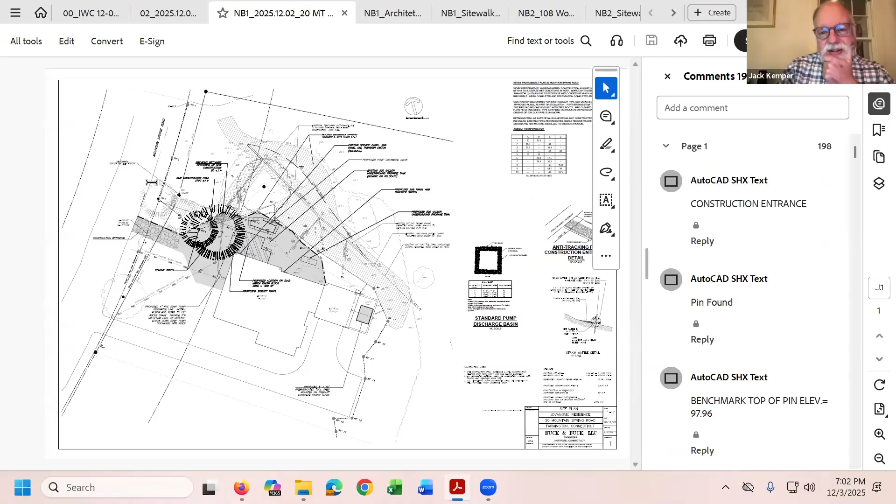First item on the agenda is Jack Kemper, 20 Mountain Spring Road. The applicant here? Yes, Jack. Good evening. I wanted to thank the commission for coming out a couple Saturdays ago to the site. Anna is here, the owner, and Bill Aston is here, the engineer. So for any questions, we can answer them.

I think we got some guidance from the commission on that walk, and I'll probably have Bill talk about that. I think a stockpile area was moved, and a couple things. I'll let Bill speak to that, and then we're available for any questions.

I don't want you to reintroduce the whole project again, but could you speak to the details that the town staff raised and how you addressed them. Yeah, I think I'll let Bill talk to them because I think they were mostly engineering things. Bill Aston from Buck and Buck Engineers.

The changes that we made to the plans based on staff comments are we took away the stockpile and replaced it with a pump discharge basin. And we added some notes that all the excavated material will be directly placed into a truck and hauled off of site rather than stockpiling it.

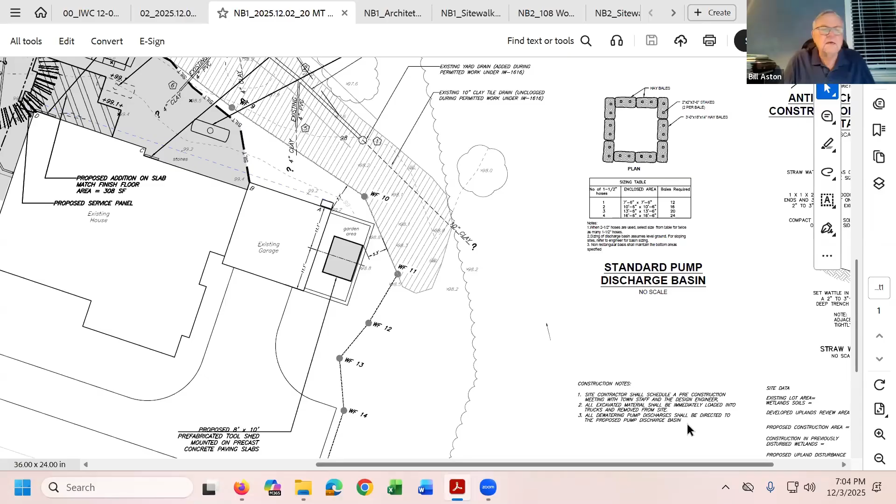I just saw Bruce's new comments, and he'd like the hay bales not only staked but sort of dug down into the ground a little bit to prevent the water from just flowing under them. It will flow through them anyway, and then along the grass surface between the pump discharge and the swale that's to the north across wetland soil, but it's all grass, so that will be a good media to take out any silt that gets through the hay bales.

There'll probably be a little discoloration during the process, but those fines are so fine that even a hay bale won't take them out. But we've got about 30 feet of grass for it to flow through. So that should do a pretty good job of cleaning up the pump discharges.

I think the only other thing is that the pump chamber will be able to be used not only for the foundation excavation, but also the excavation for the proposed propane tank. And I'll just add that we talked about having a pre-construction meeting with town staff that we've agreed to before the foundation goes in. Right, and that's noted on the plans too, as part of the construction notes that we added.

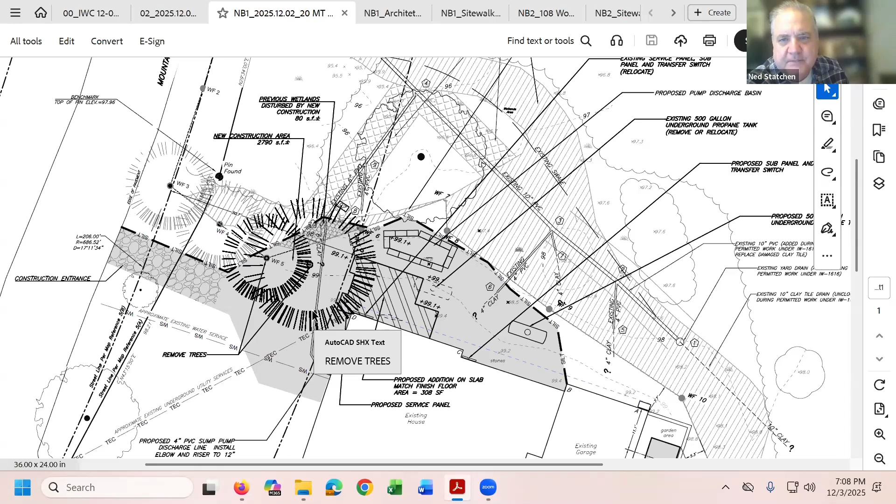Do you have a method to remove the water from the hole as it comes in? It's going to be very muddy water. Is there an operation you've determined to help dewater that hole before the tank can get put in? And would it include some sort of filter for the water before it goes back into the wetlands? We'll use a sump pump, a dewatering pump, out of that excavation and pump it into the pump discharge pit.

So we'll use it for both the propane tank and for the foundation. They'll over-excavate it, put stone in, and then continue with the excavation. It will probably require some kind of hold-down pad too, and we'll be working with the propane supplier to come up with all of those details.

I don't know what the schedule is like, but by the looks of it, the tank will have to be done first. So you're going to have a pre-construction meeting for the tank and the addition. If they're done concurrently, it could be one meeting. If they're not done concurrently, based on weather or whatever, then I'd just like to see them both done.

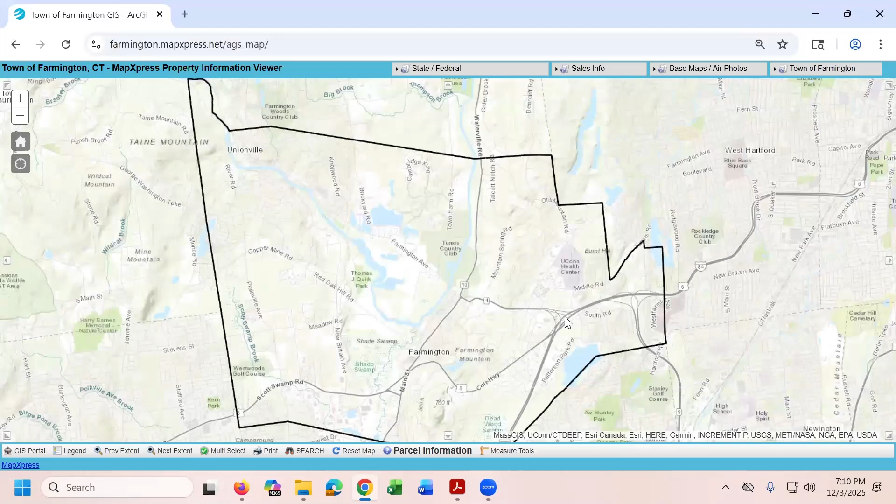Yeah, I just had one. I was looking at the town GIS and it shows that the site is within probably two natural diversity database sites on the DEEP website. So I was just wondering if anybody had contacted DEEP regarding that situation. I have not. We have not.

The database contains areas where there are locations of endangered, threatened species, or species of special concern, and you should be contacting them. They would identify what those species are and provide recommendations for mitigation measures or best management practices while you're constructing the project. I think since I've worked there, they now have a portal where you could apply online, provide your project information, and they'll get back to you with the identification of the species and those best management practices. So I recommend that you do that.

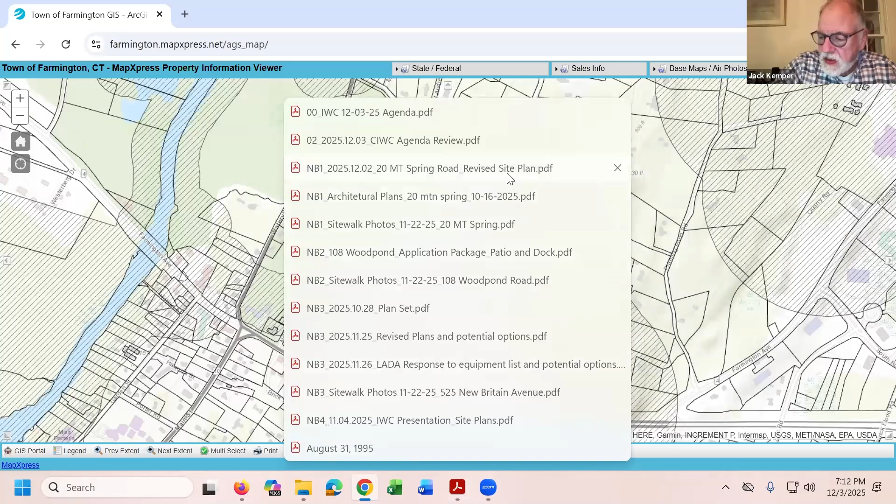So that's the NDDB website, right? Right, Natural Diversity Database. Is that part of DEEP, Dave? Yeah, it's in the Wildlife Division. All right, writing it down. I'll help you with that, guys. Thank you. That's all I have.

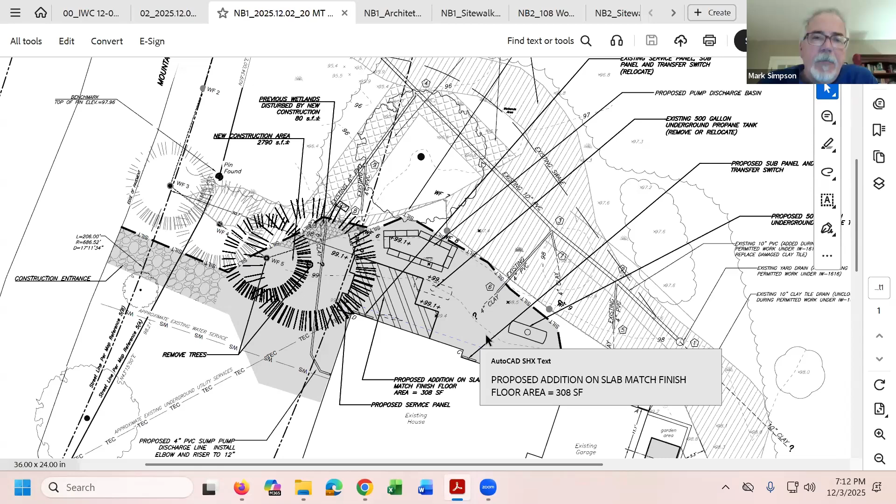Dan Popovic, am I saying your name right? Popovic? You are. Okay, thank you. Do you have any questions? I do not at this time. Okay, Mark Simpson? No questions. Alana Carveth? No questions.

Okay, I have a question for you, Bruce. What's your comfort level on this, only getting the plans yesterday? Do you think that if we were to pass this, we could put the stipulation that they need to continue to work with town staff? Oh yeah, I'm fine with that. I'm fine if we just, what I would suggest is that the order would be to determine the significance and then vote on the matter.

I have a note here to possibly include the conditions of approval that I have in the agenda review, and that would be items B through G. And I would include the two that came up today regarding the installation of one tree in replace of the two trees being cut, and also just contacting NDDB. So I'm fine if we put this all into one.

Well, let's go through. I'll poll the committee. We discussed it a little bit at the site walk, but we didn't come to a complete decision. So let's see if people think that this is a significant activity, in which case we would need a public hearing. I don't think it is, but let's see what the rest of the commission feels. Rich? I do not think this is significant. Okay, Dave Fox? I agree.

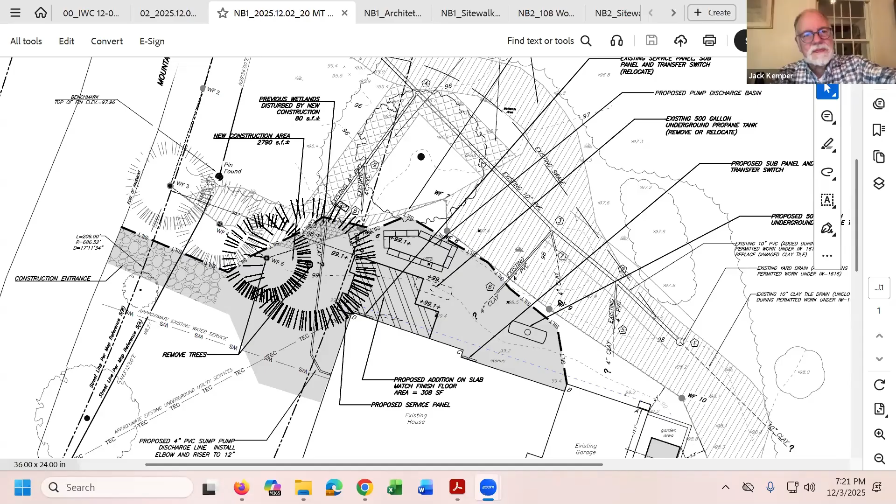Good luck with the addition. Thank you. Thank you all very much. Good night. Good night. Night.

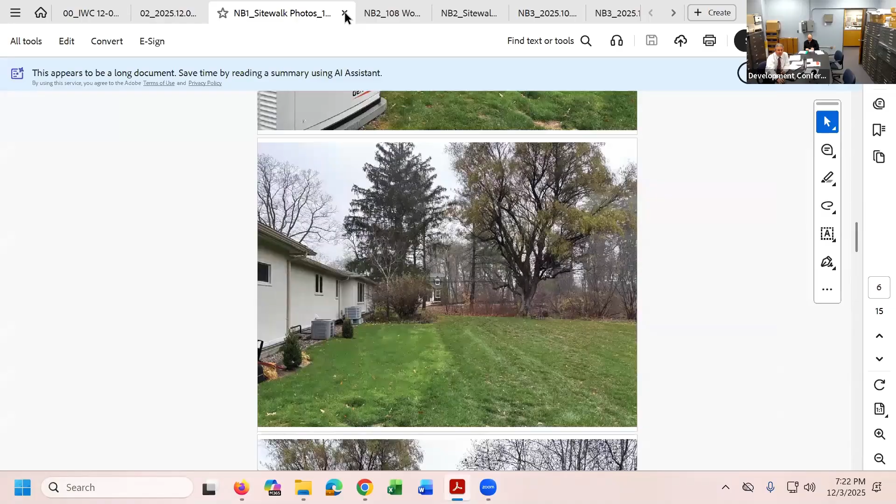Application's up on the screen. You can, well, if you want to give a brief overview, I'm not sure who was here last week or at the last meeting. Okay, yeah, so I'm Kevin Stavely O'Carroll.

I'm here with my wife Julie. You can see in this drawing we have a shed that is 8 by 10, and we've proposed putting an addition onto it. If you look at the entire footprint, you see the addition. We started it before we figured we had to ask for approval. So you can see it there in the pictures, and the footprint of the addition is less than 200.

It's 18 by 8. But when we were talking about it last time, we were taking into consideration the size of the roof, because that would displace more water. So that's what some of the confusion was.

We'd like to get approval for this and then a dock to come out from it. If you go back to the initial drawing, it'll show you where the proposed dock is. That was approved by our group here, the lake community, and it was agreed that it would be 20 feet away from the hedge line, so it didn't interfere with our neighbor's privacy.

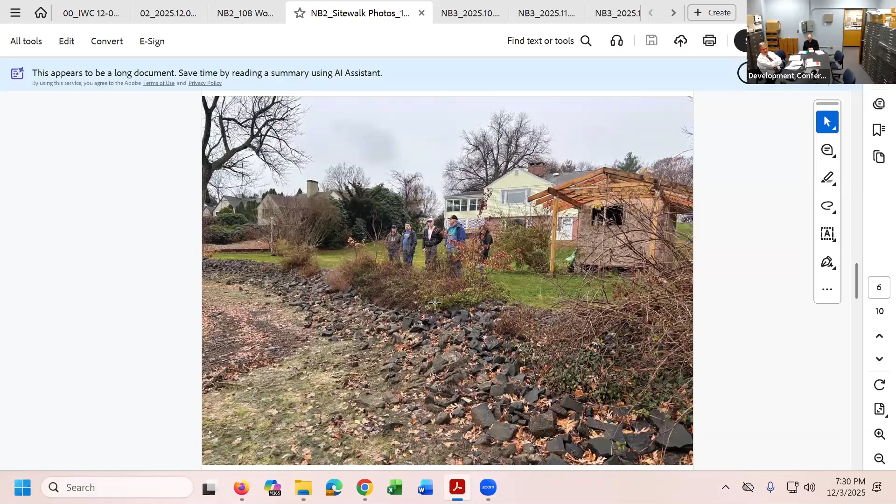Thank you. Just so I understand, what does the B and C portion mean? Do we have to do additional things? These are the comments from Bruce and the town staff. Erosion control shall consist of straw wattles - that's a tube made of hay around the construction area. And notify the planning department once all control measures are in place prior to any start of construction. Bruce can go over this with you before you get started. The main thing is the patio and the dock getting started - those are the areas that are going to need it.

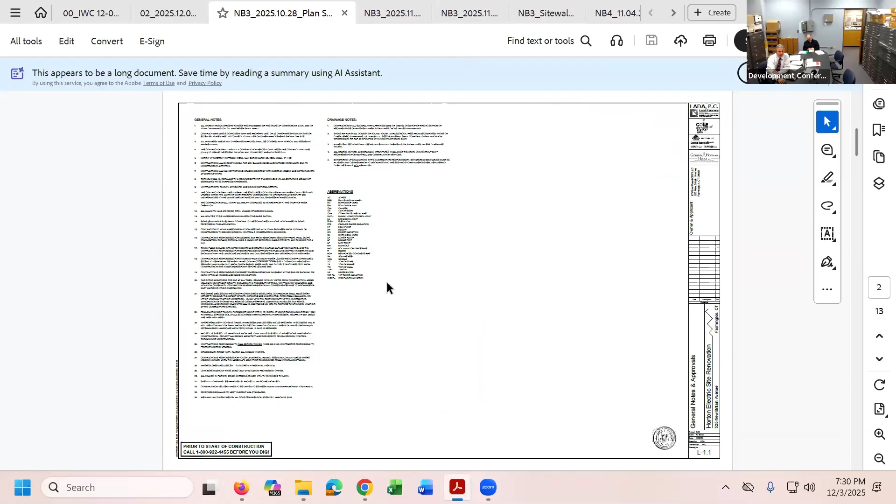All right, Bill, are you there? Yes, I'm here. All right, I've got two sets of plans - I got the original set here, and then I have that revised set you sent with all the options. Let me know which one you want me to use. Let's use the revised ones right now. All right, let me go quickly - is there a certain page you want to be on?

Yeah, let's just use those, because that's part of what we discussed in the field, and it also reflects some of the comments that Bruce, you have made over informally to us. I met the various members of the commission on the site along with other members of the team, Brian Panico from Cole Engineering, Ian Cole, our soil scientist, and Warren Horton, who owns the property now. You'll recall this is a 2-acre site. It's in an industrial area. Buildings existed since the early to mid 1970s.

We are proposing to construct an outside storage area, about 14,000 square feet to the north, immediately adjacent to the building. We walked around that area - it's a space that was once approved for a building addition. It's been used for other things informally since then, and our proposal is to pave that and put in a stormwater system that addresses the entire site.

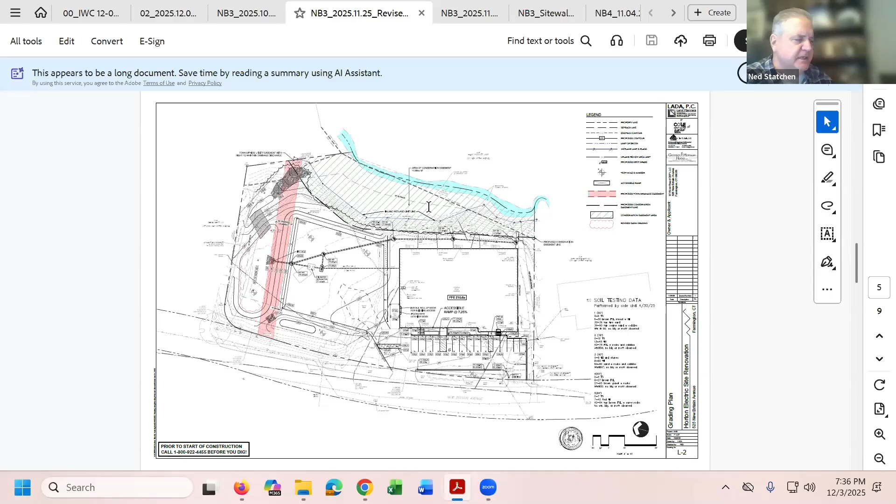I had a question that during the site walk, there was an area with an erosion gully that had crept into the overall backyard of the property. Did that get into the town's statements or your staff comments? No, unfortunately, I don't think it addressed that. I know they were saying that embankment was very soft.

I think we thought the main reason was the gutters probably weren't cleaned. Now with all the gutters being cleaned and tied into a formal drainage system, that should stop that. Yeah, but we had discussed at the site meeting that they should repair the gully area, the erosion gully area, right? All right, I'll add that to it.

On the plan, Mr. Chair, I had not proposed that because I am concerned about placing fill on that hillside in an isolated area immediately above the wetlands. That gully in this picture is just in front of where the Japanese knotweed starts. If the commission would like us to fill that, we certainly will, but it makes me a little nervous to be adding fill in that area.

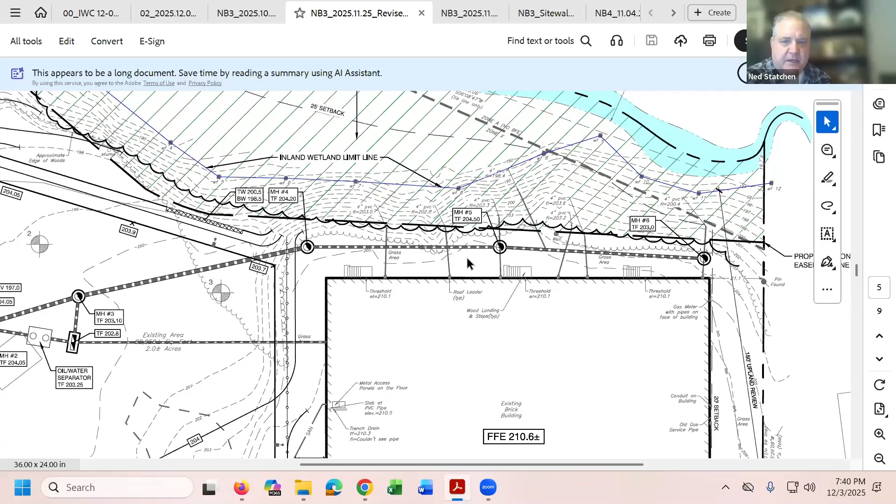I think we talked about how the ponding that happens in front now is going to be avoided because you're going to totally regrade that front parking area away from the building and carry it over to the secondary sedimentation, correct. Bruce is showing the direction of the flow. We'll be directing it into a water quality basin, and following treatment, that water would flow into the stormwater basin.

All right, that's the only question I had now. We'll poll the commission - ask your questions and let me know if you think this is a significant or non-significant activity. I do not think it is significant after our site walk visit, mostly because the area being paved has been excavated and re-excavated and pushed around many times. So I don't think we're disturbing anything that hasn't been disturbed several times. But that's all I had for that.

So we'll start with Andre - questions and significance, please. I do not have any questions. The riprap, honestly, and filling that gulch area were my two questions, and they were answered, and I don't think it's significant. Okay, Rich? Don't have any questions, and non-significant.

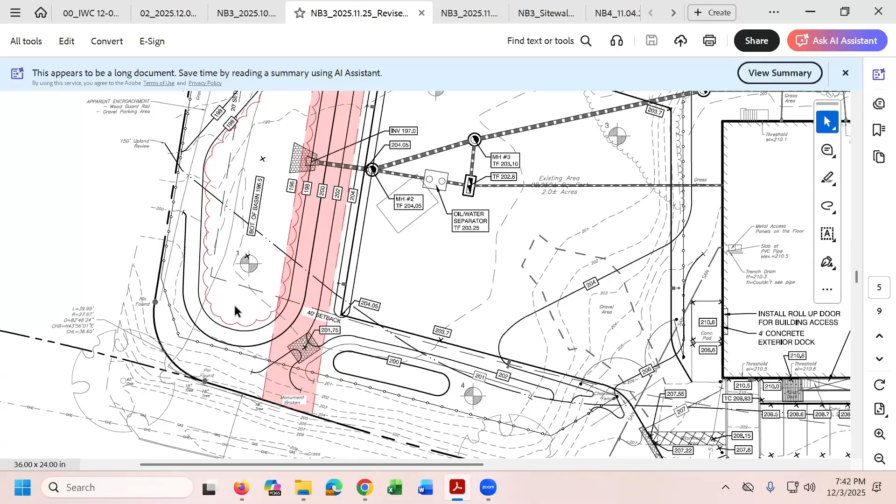Thank you, Dave Fox. Yeah, I have a couple of things. I was looking at the plans and it looked like the temporary sediment traps, I guess for during construction, are the same place as the infiltration basin. I thought that was not a recommended activity.

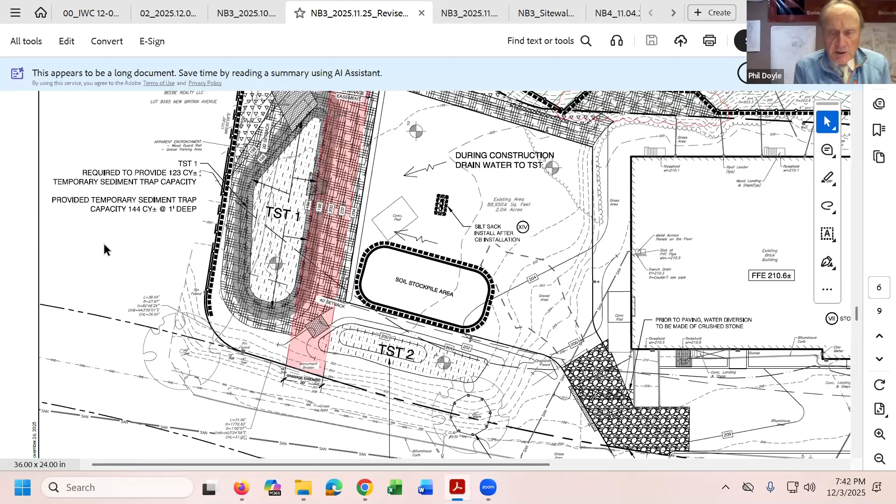We have a relatively limited area for that type of temporary sediment trap. We would have to be cleaning those out as part of the program before we would turn that into a stormwater basin. We have to remove any material that was in there and reestablish that existing subsurface soil layer.

Commissioner Fox, yes, that is one of our big concerns that we always have. As part of this one, we said the same thing - there's really no room to put a temporary sedimentation basin. So they would keep it about a foot or two above the bottom and then come back and excavate it down to final grade prior to any kind of paving. If you're okay with it, I'm certainly okay as well. It was one of the ones we were trying to figure out the best way to do this, and I think that is the only way, unfortunately.

My other question was on the conservation easement. Part of the conservation easement is where one of these stone riprap areas are going to be. Is that going to be a problem, Bruce? Having activities within the conservation area - yes, our comments do reflect to either move that easement line or pull that back, so all this work is out of that easement. As long as that's worked out, that's all I have, and I don't think it's a significant activity, particularly with the conservation easement. All of the work is being done in previously disturbed areas.

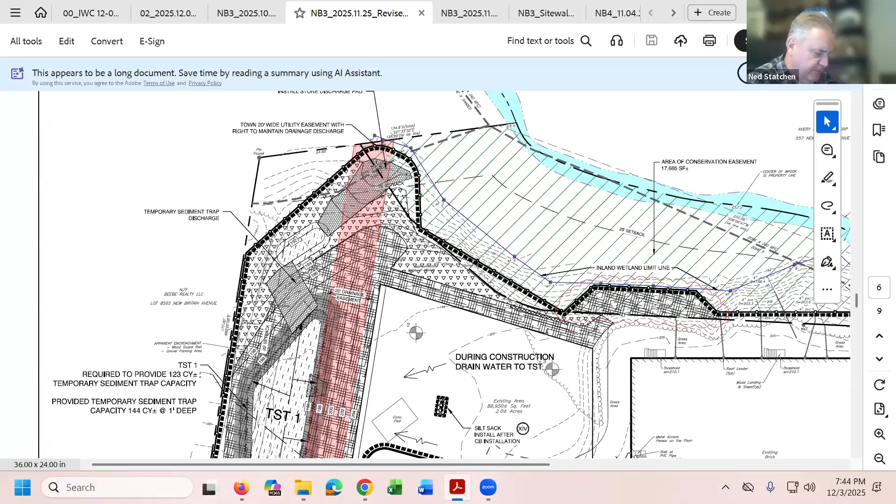Dan Popovic: I was not at the walk, but after looking at the information and listening to Mr. Doyle, I have no questions, and I do not think it's significant. Mark Simpson: No questions and non-significant. Alana Carveth: I have no questions and I don't think it's significant.

So we'll deal with significance and then we'll vote on approval with the stipulations that the staff and the commission have brought up.

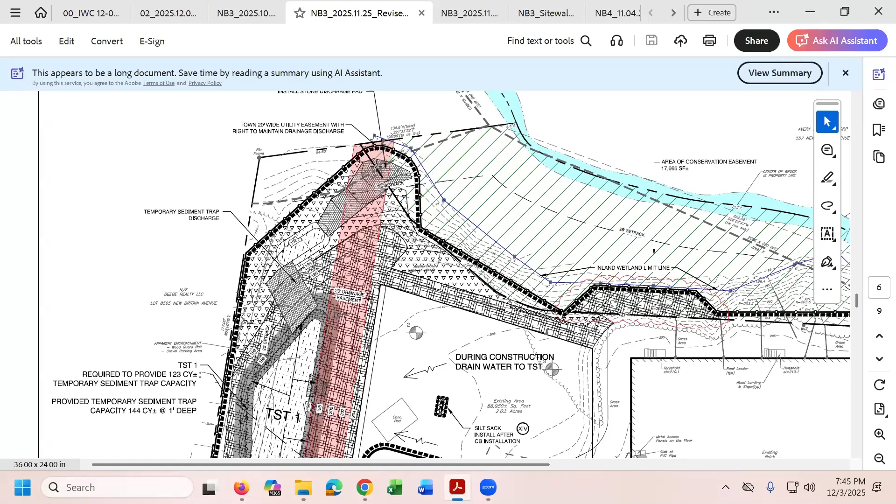Chair will entertain a motion that this is not a significant activity. So moved by Dave. Second. Motion has been made and seconded that this is not a significant activity. All those in favor say aye. Aye, aye, aye, aye, aye. Opposed? Abstain? Motion passes.

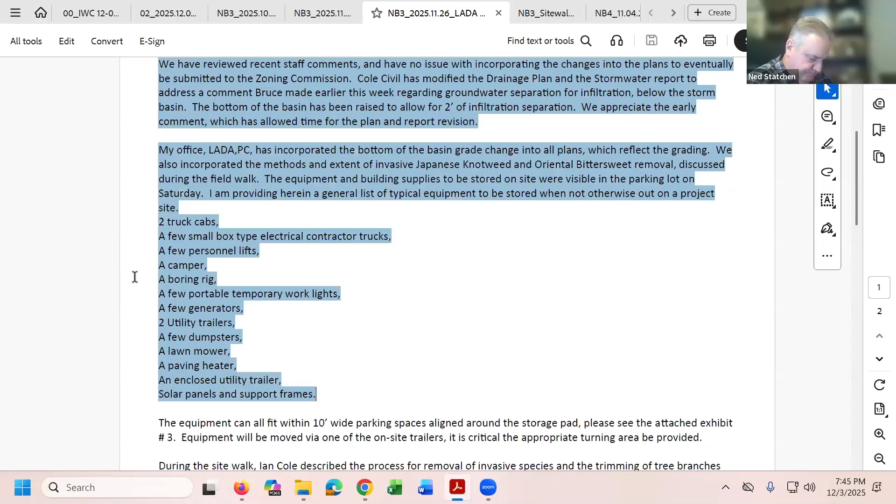In regards to the staff list of equipment and materials - Chair, there was one other item, just going through the conditions of approval, that the commission and staff did want to see a list of equipment and material to be stored. So this was a typical part of their list here I have on the screen of what they plan on parking or storing back there.

Okay, and then all right, I don't see anything there that raises my concerns. Does anybody have any considerations towards the list that Bruce is showing us?

This is Rich. I just assume the dumpsters are going to be empty. Correct, correct - the dumpsters are usually on projects, but when they're not on the project, and I think there might have been one on the property when we were there, but they're empty. Okay, that's my only question. Thank you.

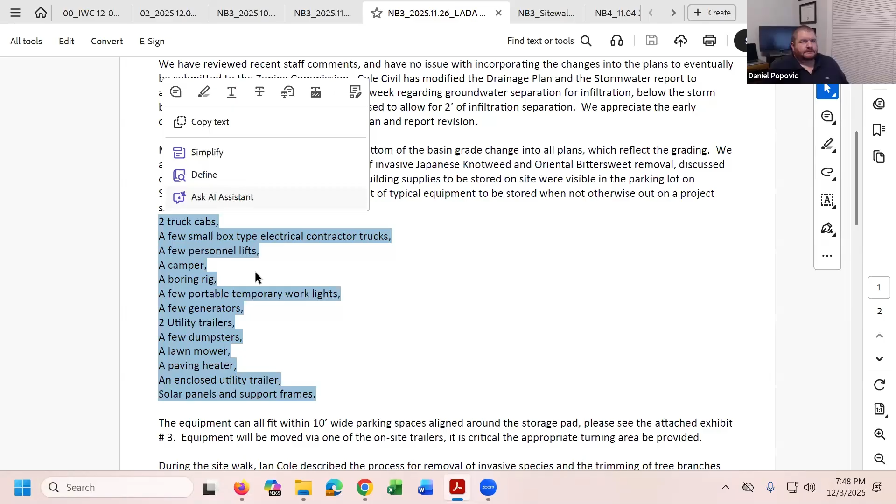Do I need any other stipulations, Bruce? No, I think you hit everything there. Okay, can I get that motion please? So moved, Mark. Second. Andre was in there, Mr. Andre - yep, second. All right, motion is made and seconded to approve the application with the said stipulations. All those in favor say aye. Aye, aye. Opposed, abstain. Application passed.

All right, good luck. Thank you for your time. Thank you.

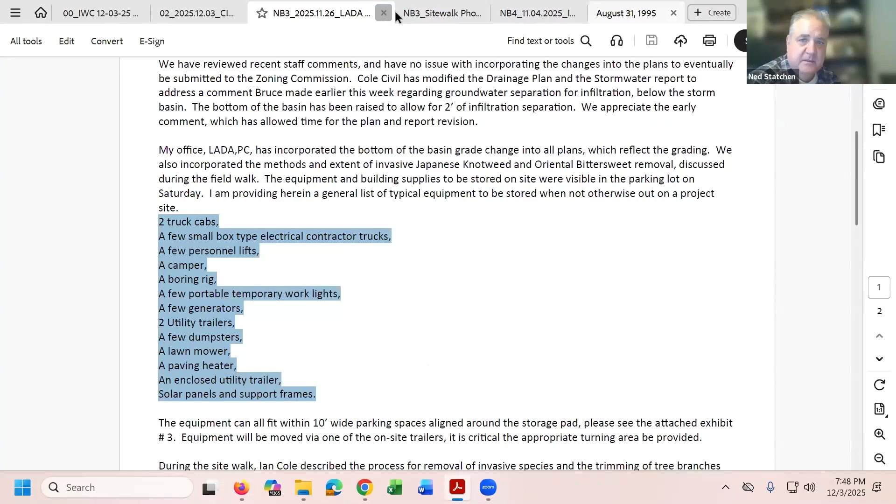Okay, next item on the agenda, Big Y Foods, 500 South Road.

You ready, Mr. Chairman? Yep, go ahead and give a little explanation of your project, mostly focusing on - I know you've already had discussion on it, but anything you've done to meet the town staff recommendations.

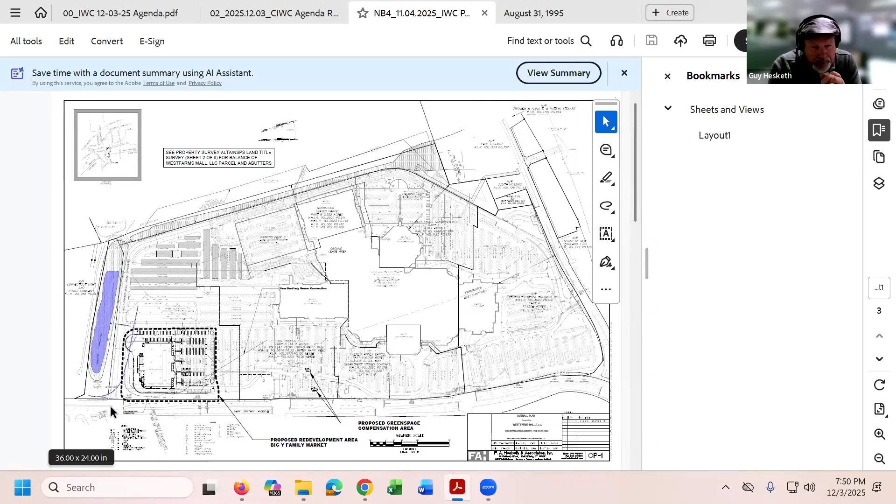I appreciate that. For the record, my name is Guy Hesketh. I'm a licensed professional engineer with F.A. Hesketh and Associates. Our corporate offices are in East Granby, Connecticut, and our firm assisted Big Y Foods Incorporated in the preparation of the applications and materials before you. Subsequent to our last meeting, I'll just review quickly: in summary, we're going to propose to build a new Big Y family market on the southwest corner of what we call the Westfarms Mall parcels, located just to the north of the South Access Drive.

To the south of that Access Drive, you can see on that plan that Bruce is highlighting, there's a stormwater detention basin there. That stormwater detention basin is a resource area. As you can see, there's a small portion of the work on the southwest portion of our redevelopment area, defined by that bold dashed line, that falls within your upland review area.

So at our last meeting, we gave you a comprehensive presentation on what the elements of that proposal were.

The ones that impact the stormwater and wetlands resources: the current stormwater collection system located on the southern portion of the mall property, which primarily drains paved parking areas, drains into that stormwater detention basin, including all of the area where our proposed redevelopment is located. Most of that area is characterized as paved parking, with the other portion being turf parking. All of that stormwater is collected and put into a storm drain system that discharges into that stormwater basin.

When we do our development, we're going to collect that stormwater and also discharge it into that stormwater basin through the same discharge pipes. Then that basin leaves, water leaves the basin, and a 72-inch pipe travels north along the western side of our project area, snakes around, and discharges across New Britain Avenue into Rockledge Brook.

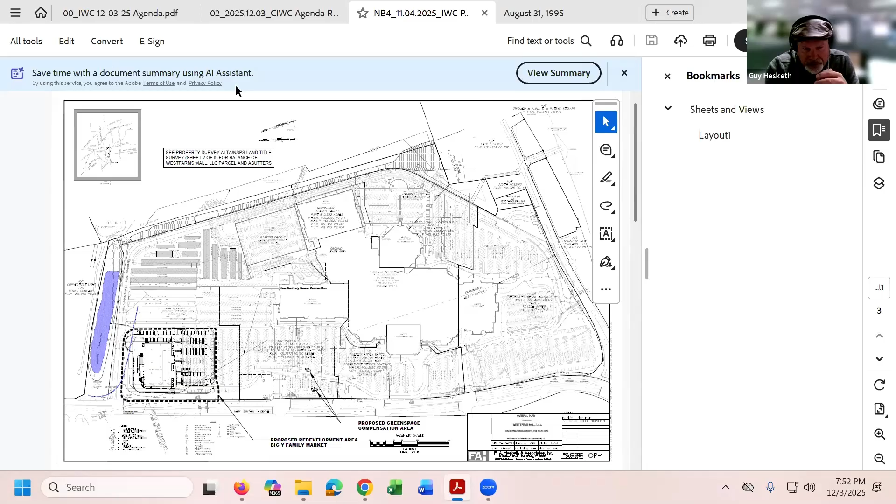So we're not changing any of the drainage patterns on the site. We are, however, going to incorporate into our stormwater management system a couple of underground stormwater infiltration and detention structures that will mitigate any peak increases of runoff from the site, ensuring the peak rate of discharge leaving our redevelopment area will be less than the existing condition peak rate of runoff.

You can see on the map that Bruce has here, there are 2 underground stormwater infiltration systems. Those systems will collect stormwater from the loading area in the rear and the east and west sides of the building area. And in the north parking lot area, the redeveloped parking lot area, that stormwater will be collected and discharged into the same storm drain pipes that travel south and discharge into that basin.

So subsequent to our previous meeting, we did meet with staff. Staff had a number of suggestions for making improvements that would increase treatment for the stormwater. That included putting trap hoods on all of our basins, integrating some hydrodynamic separators into our design, and increasing the size of at least one of the smaller underground infiltration systems — we're going to add another row, increasing the capacity by 25%.

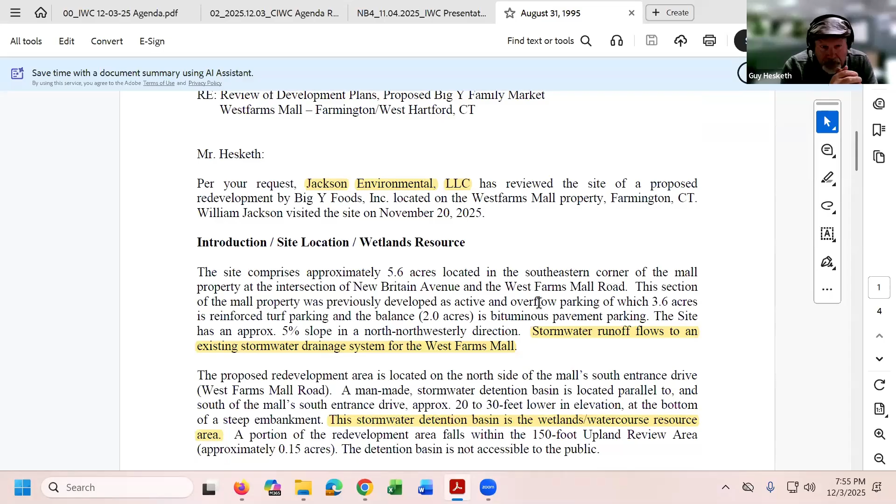That's pretty much in a nutshell. But the conclusion that Mr. Jackson has on the last page of that letter indicates that he believes the measures we're implementing for stormwater management and for soil and sedimentation erosion control are protective and will result in no adverse impacts.

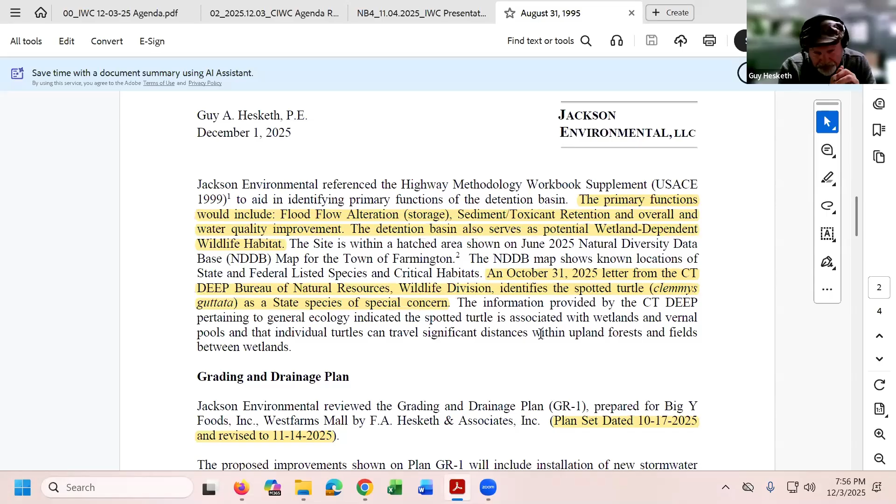He also looked at the measures we're proposing, as you recall, the NDDB bubble shows up in our area. We submitted the request online to the NDDB people at DEP, and they responded that it's potential habitat for the spotted turtle, listing a number of recommended measures, both during and prior to construction, and periodic inspections to make sure no turtles enter the project area.

Mr. Jackson looked at that and indicated that the characteristics of our redevelopment area, since it's essentially a parking lot, don't have the habitat these turtles typically frequent or an area they'd be likely to hibernate. But we're proposing a silt fence barrier along the southern side of the landscaped area on the southern access drive as a turtle barrier, and Mr. Jackson agrees that's a reasonable measure to provide extra protection.

So I think we've pretty much addressed what the commission asked for at the last meeting, and I know I gave a pretty extensive and comprehensive presentation then. So if you have any questions, I'd be glad to answer them.

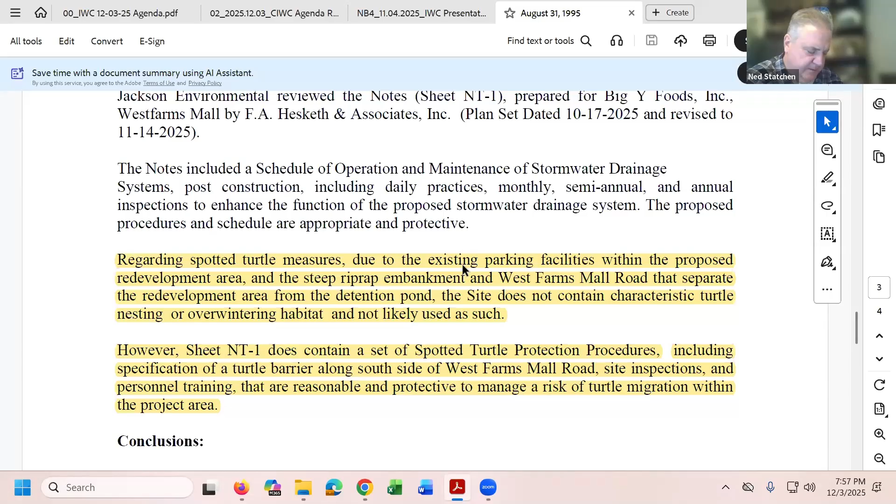Thank you. Yeah, I did take a look around that property, and it's got the flow-through pavers or whatever you want to call them, and it's still a parking lot. Then I went over to look down on the wetland, and it's a very steep grade going down to that wetland. I'd think it'd be pretty difficult for turtles to make that climb, then get across four lanes of traffic and onto your property. So I think that extra protection will work out to make sure they can't get there, by any chance, if they did.

I don't have any additional questions. I know at the previous meeting we did vote that this is a non-significant item or project.

Bruce, have they met your requirement on town staff review comments, do you think, or should we include a stipulation for that? Include that, because we had a meeting Monday afternoon and discussed our comments, and they indicated—I'll let them speak for themselves—that they had no problems addressing our conditions of approval.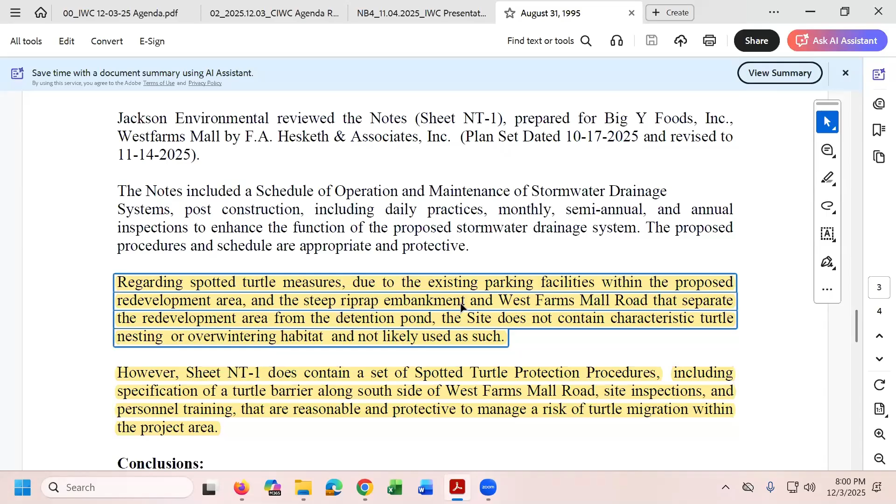Andre? I do not have any additional questions for this project. Rich? No additional questions. Dave Fox? Just a question for Bruce—the bottom of your page has conclusions, but we can't see what they are. Oh, sorry. There you go. How's that? Thank you, that's it right there. Thanks, Bruce, I have no further questions, I'll read these. Dan? No questions, thank you. Mark Simpson? No questions. Alana? No question. Okay, so everyone's had their questions answered.

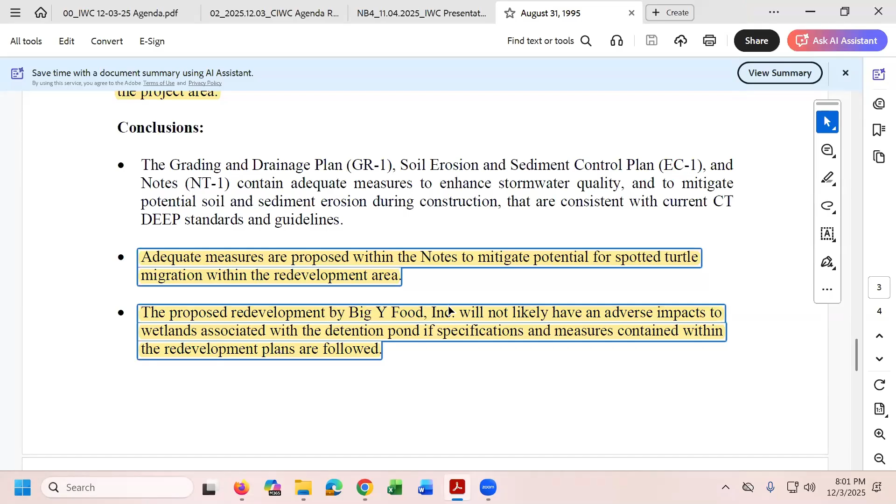So the chair will entertain a motion to approve the application with the stipulation that town staff review comments be addressed, knowing that many of them already have been, but we'll keep that in there. Can I get that motion, please? So moved. Dave will second. Motion made and seconded to approve the application. All those in favor say aye. Aye. Opposed? Abstain? Motion passes.

Good luck to Big Y. Thank you very much. Appreciate your time. All right.

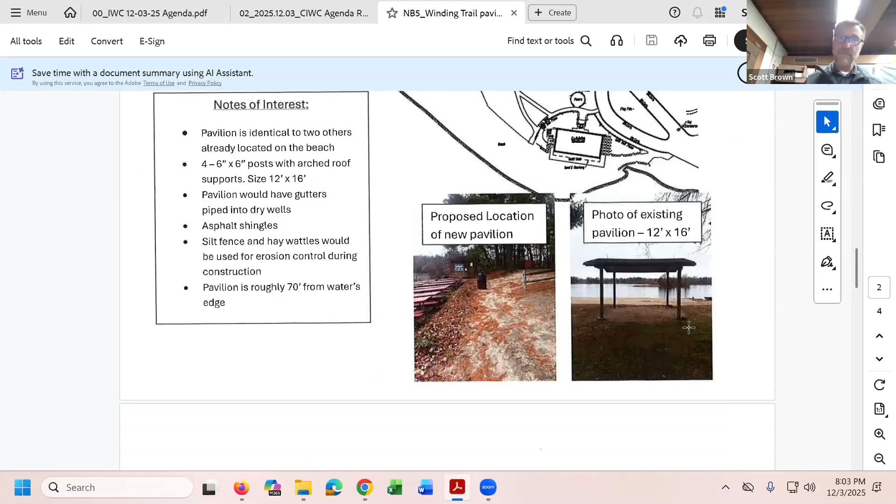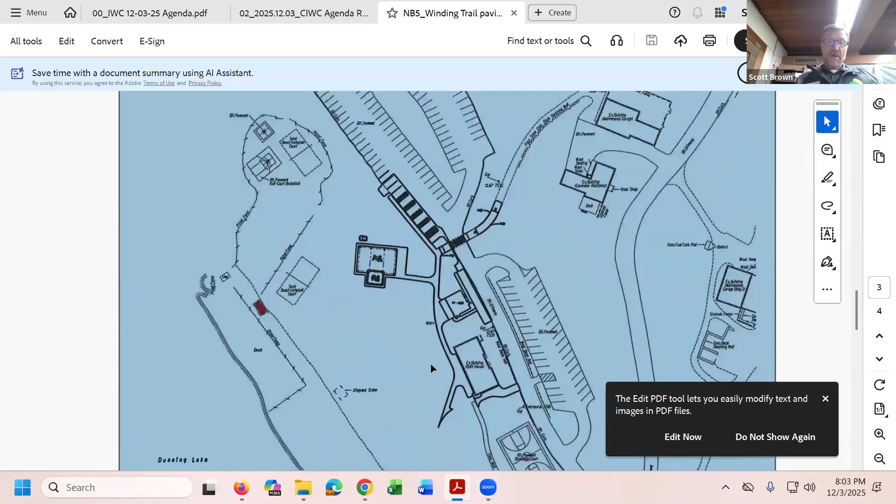Not sure what else I need to tell you. We will certainly do the silt fence and hay wattles during construction. This will just have a sand bottom, no concrete floor. It's a company we've used called Unalam out of Unadilla, New York. We've done probably 12 or 15 of these. Two years ago we did a rather large pavilion, the Lakeside Pavilion, which was 40 by 80. This is just 12 by 16, a little area to provide some shade and a space to regulate the kids coming in and out of the camp swim area.

Okay, any questions? And you said there's going to be 4 typical round concrete footings? Yeah, I also provided the town with the engineering on that. They're 24-inch pylons that would be dug. It's only 4 posts, as you can see in that photo there, and it's all designed based on wind lift and hurricane levels and all that stuff.

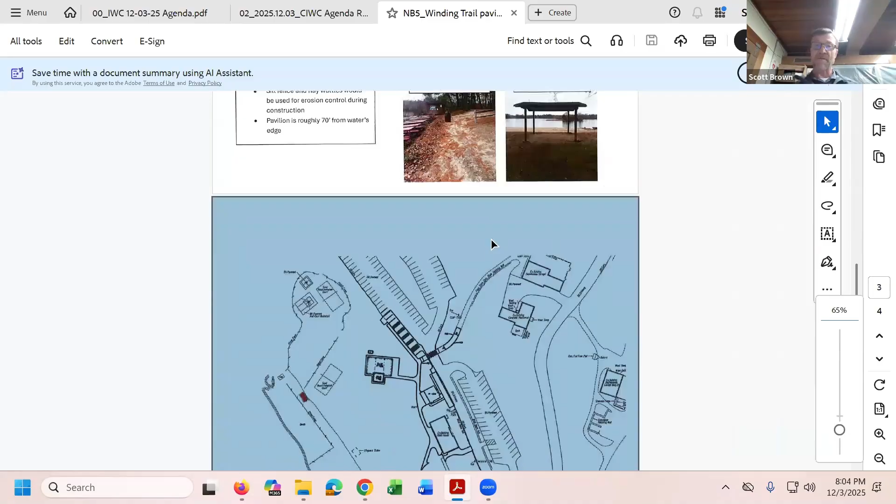Is it designed to withstand that in here? I don't see it in the submittal that you sent us. Is that somewhere in here? It was a form called RW White, unless I'm forgetting, but maybe we didn't get it. I can certainly get you that—it's the same submittal we've used on all the larger pavilions. We've used it for the last 10 years, but I can certainly get you that.

And is that comparable to the usual sonotube footing? Correct, yes. Yeah, okay.

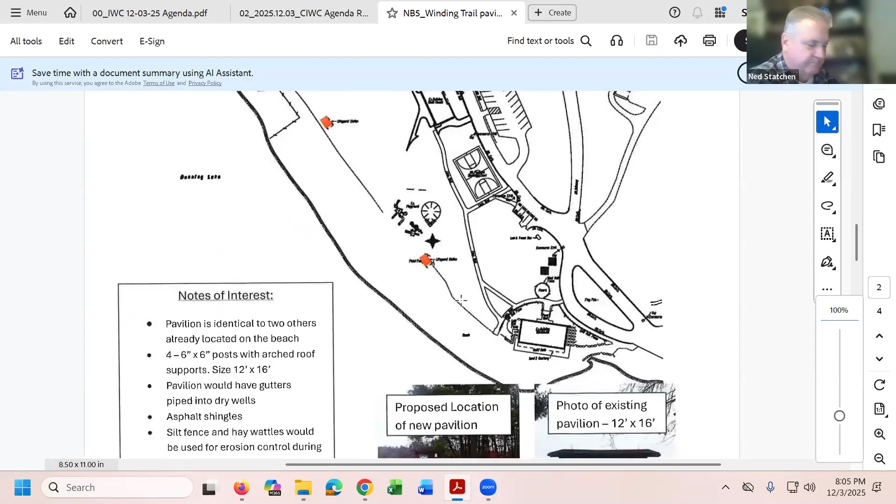Are you bringing that up, Bruce, or are we all set? Oh no, sorry, I can't get it from here. Okay, all right, no it's fine. It's just pretty typical from what he's explained. Okay.

Well, we're just going to accept the application tonight, and determine if we need a site walk. I don't have any further questions. Let me poll the commission. As I poll the commission, please ask any questions you might have, and then let me know if you think a site walk is necessary.

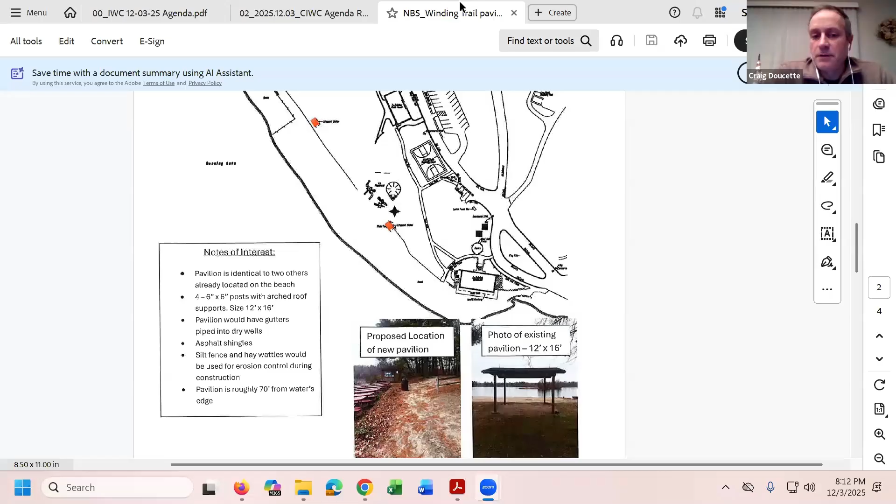All right, next item on the agenda, 89 Lido Road. Hi everybody, thank you for sticking around for this one. We are looking to— can we get your name and address for the record, please? Craig Doucette, at 89 Lido Road.

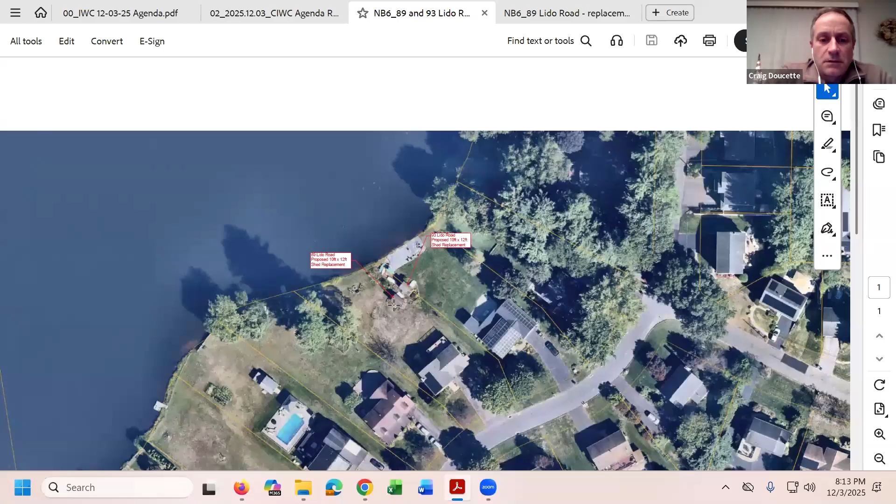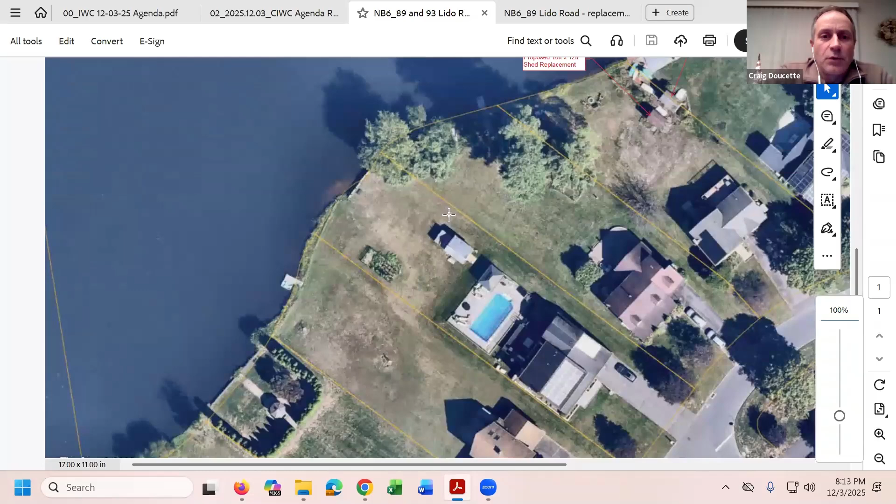What is the foundation of the shed? The current foundation is on pylons, but those are being removed and we're replacing it with a bed of crushed stone. Is this being constructed on site or delivered to the site whole? The bed of crushed stone is being built on site, with the shed pre-built by Cloder Farms and delivered.

So you're going from a 10x14 shed to a 12x16 shed? No, 8x10 to 10x14 — the crushed stone area will be 12x16. I thought it was 10x14 to 12x16. No, the 12x16 is the size of the gravel base, the shed itself is 10x14. I messed up when I did this plan — I put 10x12, it should be 10x14 with 12x16 crushed stone. The other schematic is incorrect, it should be 10x14, not 10x12.

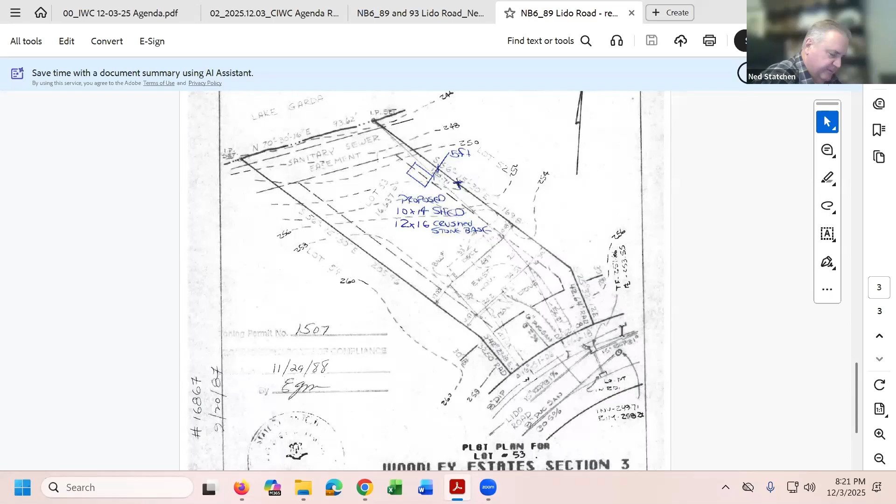I agree with you, and I don't have any questions for this. Okay, Rich, questions on use? I would agree that it's a replacement one for one, and I don't have any questions. Okay. Dave? I agree, it's a replacement of similar like, and I have no questions. Okay, Dan, I agree on likeness and no questions. Mark Simpson? Yeah, they're just replacing an existing structure, I'm fine with this being the right of the homeowner. Okay, Alana? I agree that they're just replacing an existing structure, and I have no further questions.

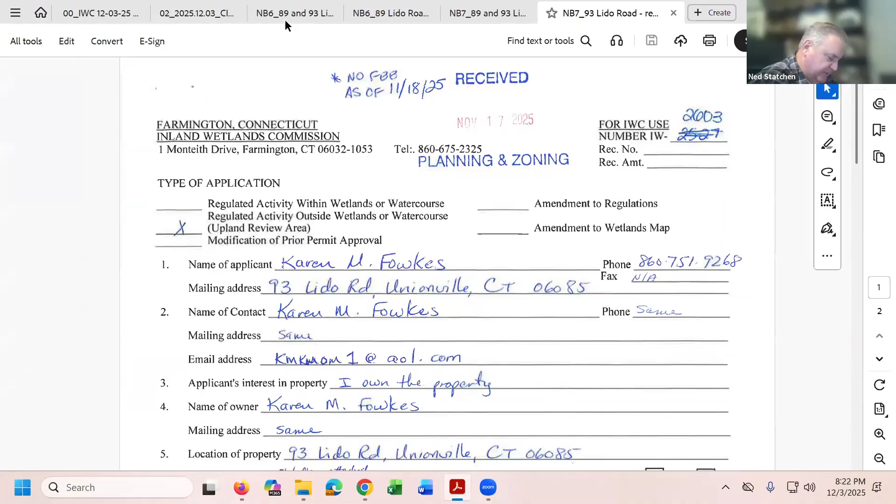So the chair will entertain a motion that the replacement of the shed with another shed is use incidental to the enjoyment and maintenance of the residential property, which is allowed. Can I get a motion for that, please? So moved. And a second? Able second. Okay, motion's made and seconded that this is an allowed use of the property. All those in favor say aye. Aye. Aye. Opposed? Abstain? Motion passes.

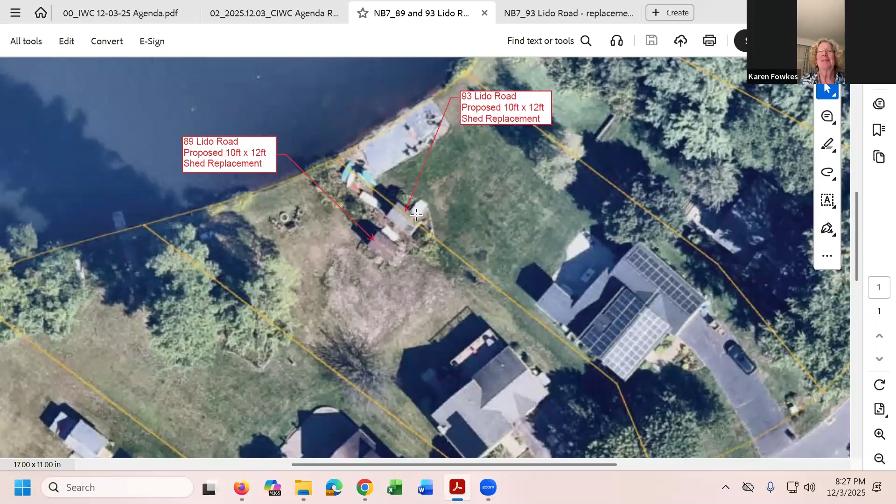61 Birdseye Road, we get that one loaded up now. So number 8, right? Yep. Another shed, must be a good sale on sheds somewhere. Do we have a limit to how many sheds? No, we have one left we could approve before the end of the year. All right, okay, I'm next. We'll let this one slide.

Sounds good. Here, Metro. There you go. All right.

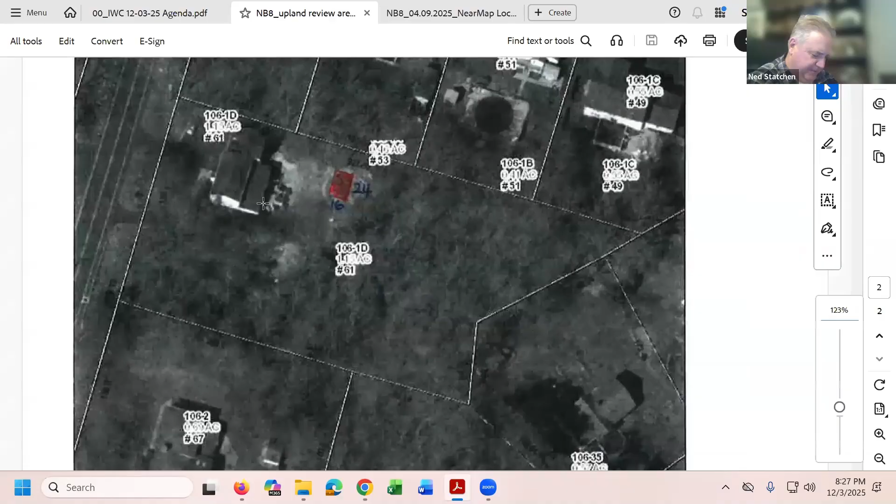Okay, Tracy Smith? Yes. Tracy Smith, 61 Birdseye Road. We're looking to put up a shed as well. We're just wanting to put it over, as you can see on the photo, there was a pool and a deck there before, so we're just looking to put it over the same location. It'll be a 16 by 24 pre-made. Ours is barnyard though, not cloder. Ours is barnyard.

And again, crushed stone base as well, so no disturbance to the land. Okay, no excavation, yeah. Are you putting it down on a crushed stone base? Yes. Is the pool already removed? Yes.

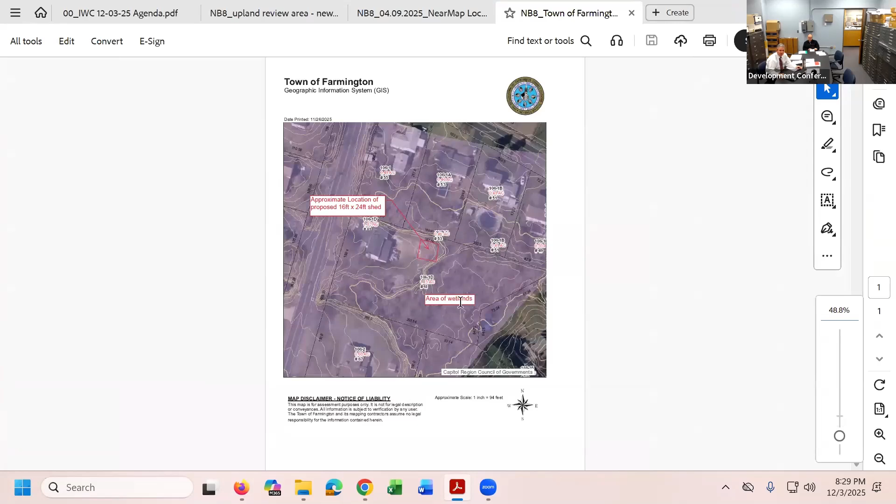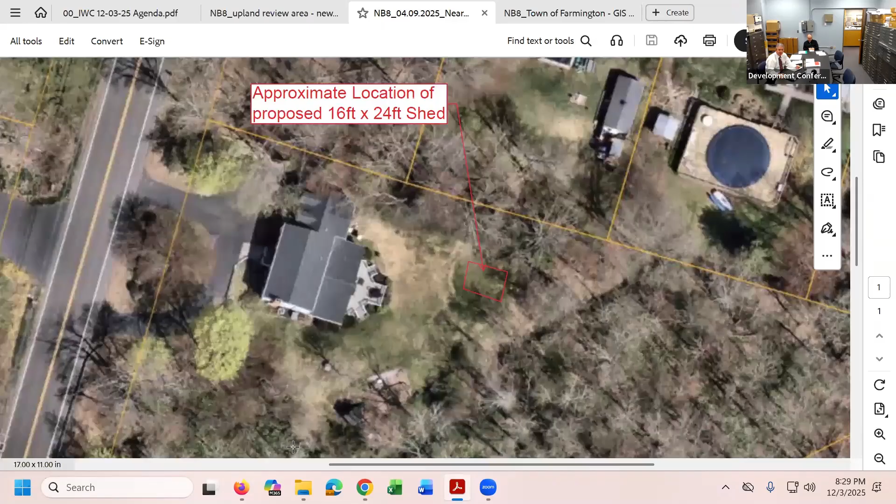Just give me one minute here. I did as part of this also, the GIS is in there, and you'll see historically it is a wetland area, the entire neighborhood. So what happens is there's a drainage pipe that comes out, or that crosses Birdseye and flows down through these yards, eventually makes its way out to Wolf Pit and back out and around.

Oh, okay, and so that's why your report doesn't include the permitted uses of right, because, well, there wasn't. Yeah, I mean, this was like, now that she's saying that there was a pool there, I mean, that's some time ago. It is all reestablished with lawn. So I'll leave that up to the commission at this point.

Okay, are we in a wetlands area on this? I missed that map. Well, I said the map does show the whole house and the whole property is in it. There has been no study done, nor with the timing of when this was dropped off. I haven't gone out there, but I think, maybe Tracy can confirm, is this the brook right here?

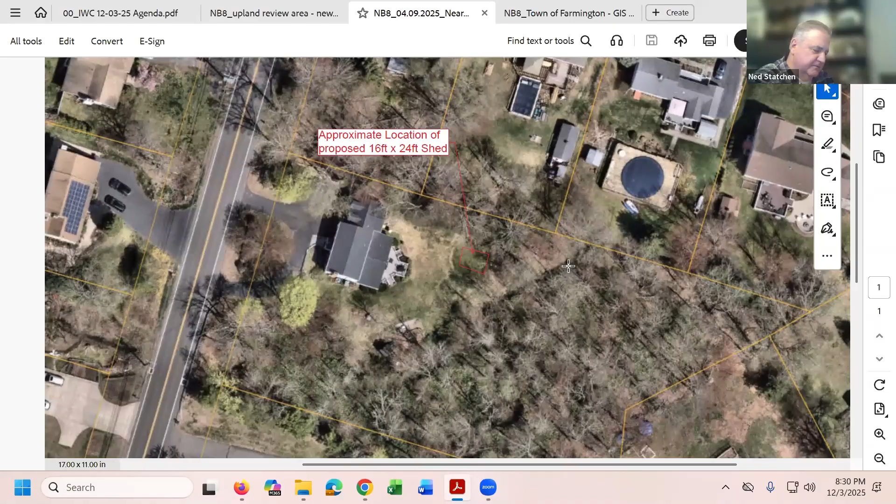Yeah, it's a little further. Yep, right where that is. So it's pretty close to the brook as well. Okay, being, yeah, all right, right here, that's what I thought this was too. Runs right down through here. Yep, so it cuts around. Yeah, so it is relatively close. I mean, there has been no wetland survey done, but it was pre-disturbed with a pool at one point, and now it's established back with lawn.

Okay, this is a little different. Yeah, this is different with the stream there. Is that a normal stream, or is it mostly just runoff? I'll ask the applicant since you live there. It's just runoff, it's not a real brook or stream, it's just kind of a wet area. So it's a wetland? I mean, I guess what he's asking is, there's water in it almost all the time, right? Yeah. Okay. It's not that it goes dry or anything, so.

I think we should accept the application for this one. It's a little different case, or kind of significantly different. I don't see a problem here. I just think maybe we should, well, the shed is 16 by 24. Yes, yeah.

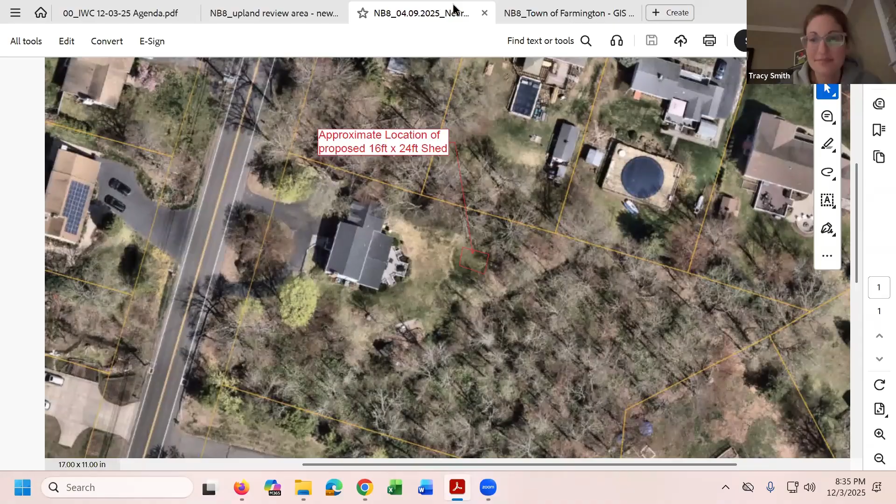Okay, Metro Realty Management, 20 Scott Swamp Road.

Good evening, Mr. Chairman, this is Attorney Tim Hollister. Can you hear me? Can hear you fine. Great, thank you. Good evening, nice to see you, it's been a few years. I'm here tonight with Ben Tripp of Metro Realty and our professional consultants, Rock Emond, who's a civil engineer at SLR Consulting, and Matt Ormrod, who is an environmental scientist also at SLR. I'm very tempted to begin, having listened to the previous discussions, to just say this is a really big shed, but I think I'll move on.

The application material is a bound narrative package with a survey, civil plans, a full wetlands assessment, and drainage report excerpts. Our plan is to give you an overview tonight of the site, the proposed plan, and why we think it's not significant, but obviously you'll decide that. Bruce, if you could switch to the site aerial, that would be terrific. There we go, so you can see where the red dot is. This is 5.4 acres at 20 Scott Swamp Road, adjoining Route 6 and Main Street on the right. The current building is a one-story building that is vacant, shown on the next slide - Bruce, next two slides.

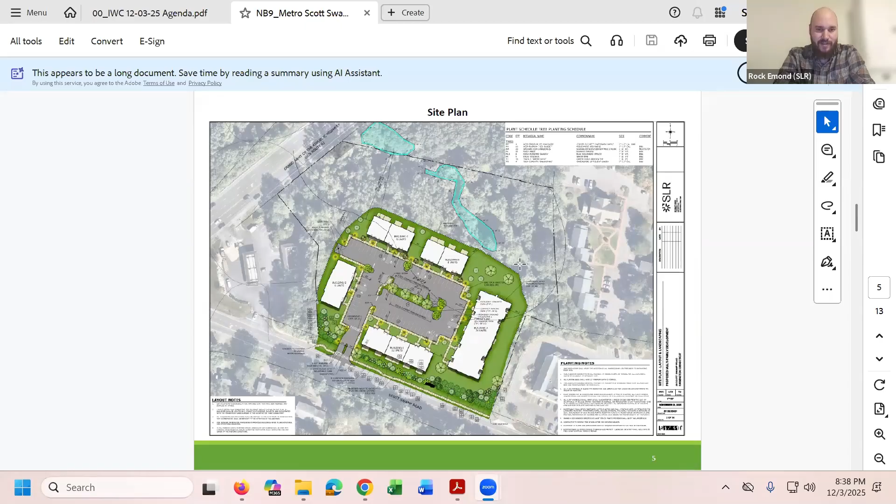Good evening, for the record, Rock Emond, senior civil engineer with SLR International Corporation out of 99 Realty Drive, Cheshire, Connecticut, here on behalf of the applicant. We're essentially discussing this particular site plan. As Attorney Hollister mentioned, we're looking to propose 5 buildings that are going to be strewn across the existing site. I would ask Bruce to bring up the next figure so I could talk about the existing conditions. Perfect. So to give everybody some context, the existing conditions consist of a large building located within the middle of the property, as well as some associated parking that wraps around that particular parcel. It consists of about 67 parking spaces.

That's a little bit of a guess number because the parking spaces are not exactly striped as of today, so plus or minus. Of that area, we're looking at about 33% impervious coverage, and the area contains a drainage system of a series of catch basins and pipes only - no existing stormwater management or stormwater quality is provided on site. Of that particular area, there is 26,845 square feet currently developed within the upland review, currently shaded in blue, located here.

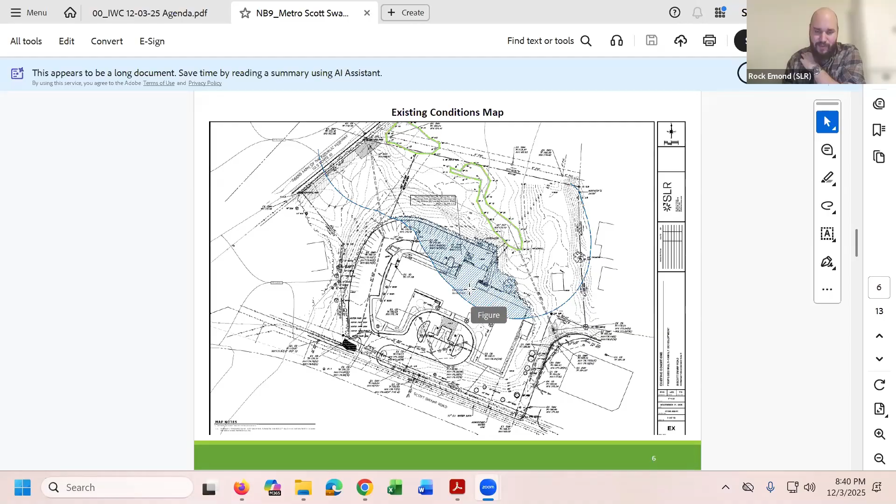About 9,150 square feet of that is the existing building, and let's see, 23 of those are parking spaces, for a total of 19,230 square feet of total impervious located within the upland review. If you can go to the next slide.

Of the two areas, we're looking at about a 12,150 square foot delta between the currently disturbed area under the developed existing conditions and the proposed. So of these two particular areas, it's only about 12,150 square feet.

If you can go to the next slide, I believe it's the perfect one. As Attorney Hollister noted, there's 60 units strewn across the 5 buildings. Of those 5 buildings, 3 are located within the upland review - 1 fully within the upland review area, and 2 that have partial areas.

Those come out to be a total of 38,995 square feet of total activity within the parcel. Once again, that's discounting the existing area, to come out to a 12,150 square foot of new cleared area. This particular area is a combination of the buildings as well as the parking, as well as a small grassed area to the east, a little all over the place.

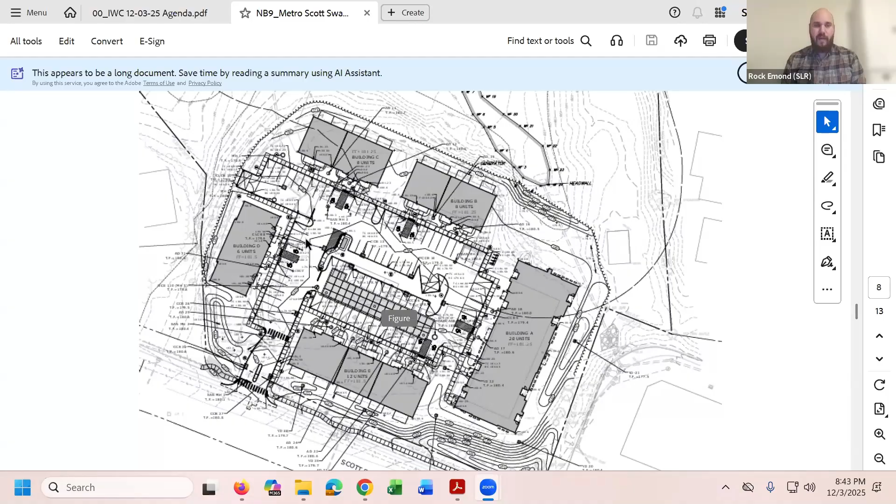So what we're doing is providing an underground retention system located just outside the upland review area within the parking - you can kind of see it in that gray shade in the middle. That will be in tandem with a hydrodynamic separator that will then discharge to the existing outlet currently on site that goes to the north along Route 6. So essentially what we're trying to do is maintain drainage patterns by connecting into the system, and we're providing water quality where there is none.

We're also providing sediment erosion controls, which I believe is on the next sheet. These sediment erosion controls are developed using the 2024 guidelines for soil and sedimentation. Specifically, within the upland review area, we kind of double up when it comes to mitigations around the site to make sure we're not going to be impacting the wetlands downstream of where construction activities would occur.

Specifically, we're looking at a combination of silt fence and straw wattles located just to the north of where we're anticipating clearing, as well as the typical silt sacks within all the catch basins, and a stockpile that would have a silt fence wrapped around it.

Outside the upland review, we have the driveway entrance located along Scott Swamp, and we are looking to maintain that as our construction entrance as well, since it's a good compacted base location. There are some areas with steeper slopes, so we will be providing erosion control blankets - that's on the north side, or northeast side, as well as the south side, along Scott Swamp Road. And if you go to the next sheet...

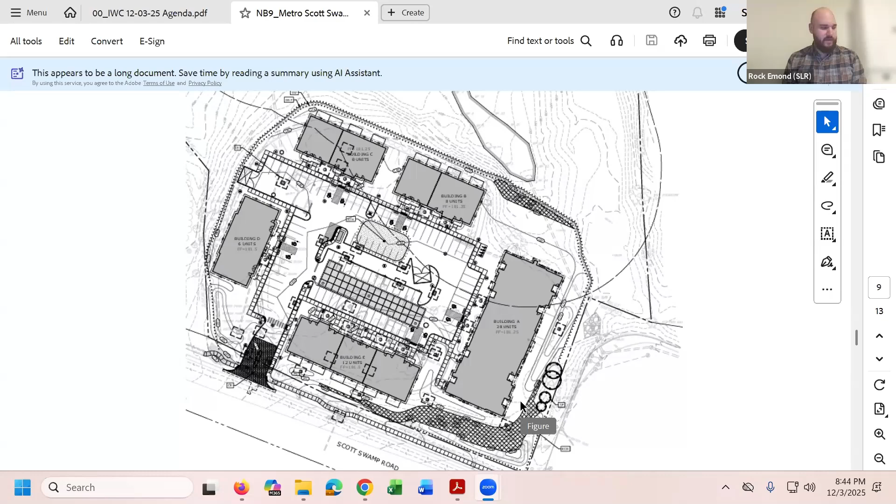I wonder if this was all flipped around, and that's why I'm a little confused.

Back, I'll go back to the other sheet there. If you go back up one, I just want to kind of wrap up the overall. That one? Right here?

Perfect, beautiful. So really when it comes down to the site itself, we're looking to provide water quality where there is none, making sure that we're being cognizant of the surrounding northern wetlands. Matt will talk about the wetlands themselves, their function and values.

To summarize, we are anticipating no change in the impervious area. We're providing water quality where there is none, and we have designed the project to meet all appropriate and applicable stormwater regulations without adversely impacting the values or functions of the wetland.

And I believe that's it for my portion. I'll pass it off to Matt. Bruce, if you can go down to, I believe it was the survey sheet, that will start Matt's portion. Thanks. Rock, no problem.

Thanks, Bruce. Good evening, commissioners and staff. My name's Matt Ormrod. I'm an environmental scientist with SLR.

As Attorney Hollister mentioned earlier, we're here on behalf of the applicant, and we performed the impact assessment. We did not do the wetland delineation; that was done by JMM Consulting. He's a certified professional soil scientist here in Connecticut.

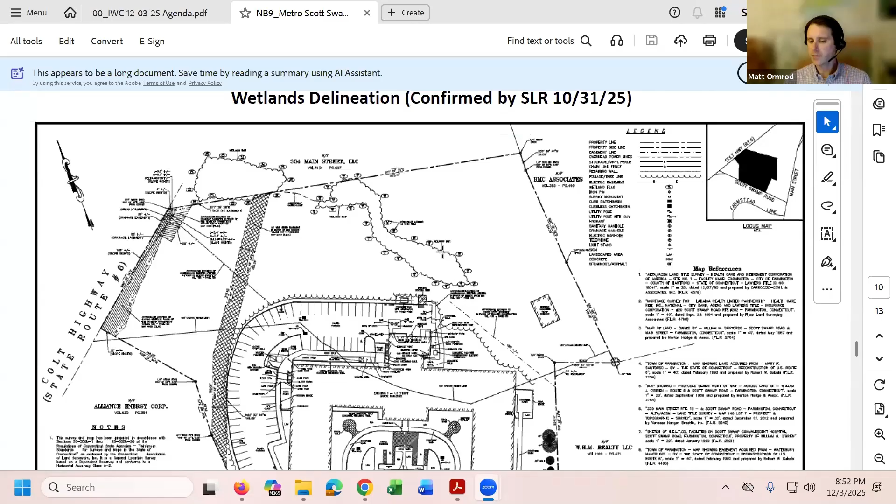Based on our site inspection, there seems to be some pretty flashy flows associated with that. There's a lot of scouring, sediment deposition, some anthropogenic debris, and that stormwater discharge is associated with off-site impervious surface water runoff that's collected and discharged.

There's about 0.16 acres total wetland acreage, pretty narrow. They may have been created from historical disturbances associated with development of the touch points facility. The vegetation is disturbed. There's a mix of native trees: red maple, white ash, silver maple. These are common in wetlands and sandy soils. American elm, spice bush, sort of facultative wetland plants. There's also a lot of multiflora rose, Morrow's honeysuckle, Asiatic bittersweet, lianas, climbing native trees, and based on the historical uses, that's pretty typical.

Based on our evaluation of the site conditions and JMM's findings, we conducted a functions and values assessment using the Army Corps' highway methodology workbook supplement, sort of a standard technique. The primary functions and values of this wetland system are sediment and toxicant retention, and nutrient removal, retention and transformation, and that's really all associated with the stormwater that's discharged into the site wetlands. They really act to improve water quality before discharging offsite and reaching the Pequabuck River and Shade Swamp.

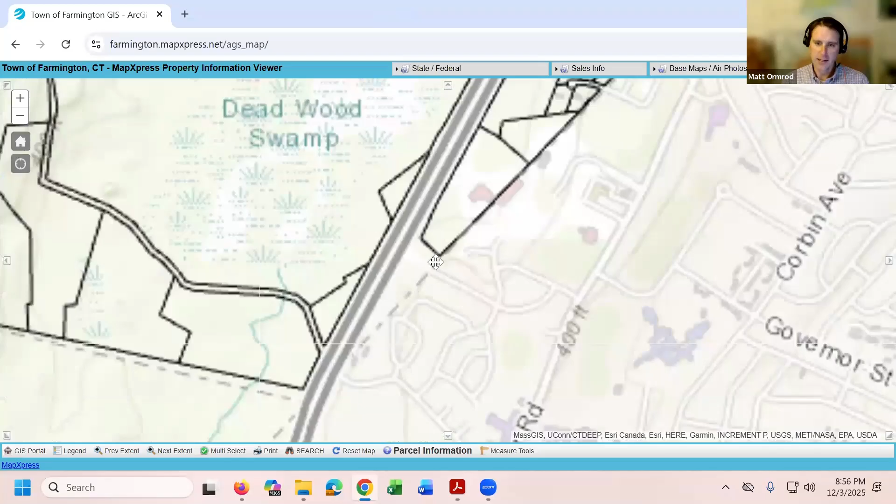Again, it's isolated, it's fragmented from the larger Shade Swamp, Pequabuck River corridor and greenway. If we were able to zoom out in this site plan, you would see that it's sort of a triangle between Colt Highway to the west, I believe that's Main Street to the east, and then Scott Swamp Road. So it's isolated, and in terms of connectivity, there's a major barrier there, so that also reduces the habitat value.

Again, Rock went through the proposed regulated activities. There are no regulated activities within wetland areas, so there will be no direct impact, no short-term direct impacts. The majority, all of the regulated activities, are within the upland review area.

From a larger scale, the development or redevelopment within the upland review area is pretty consistent with what's already out there: building, parking lot, serving the utilities that service the building. And as Rock mentioned earlier, the short-term impacts associated with construction are going to be mitigated or minimized by installing sediment and erosion controls between the resource areas and the limit of development.

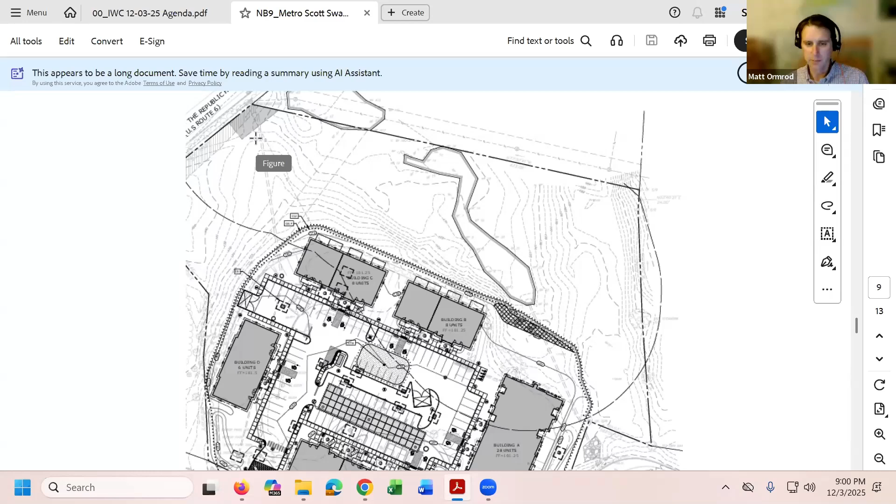But there is one big difference being the stormwater quality improvements with the proposed design.

So I think with that, thank you, I'm all set. Thanks, very good, thank you Matt.

Mr. Chairman and Commissioners, to sum up, there certainly is a conversion within the upland, replacing the existing building with 5 new buildings. We think that's an improvement. As to the wetland and watercourse, there's minimal change and an improvement in the form of introducing water quality measures. So I'll leave it at that. We're happy to answer any questions, and you need to make some preliminary determinations. Thank you for listening to our presentation.

Thank you, very good presentation. A couple questions. So how does the square footage, the footprint square footage of the original building compare to the square footage of the 5 new buildings?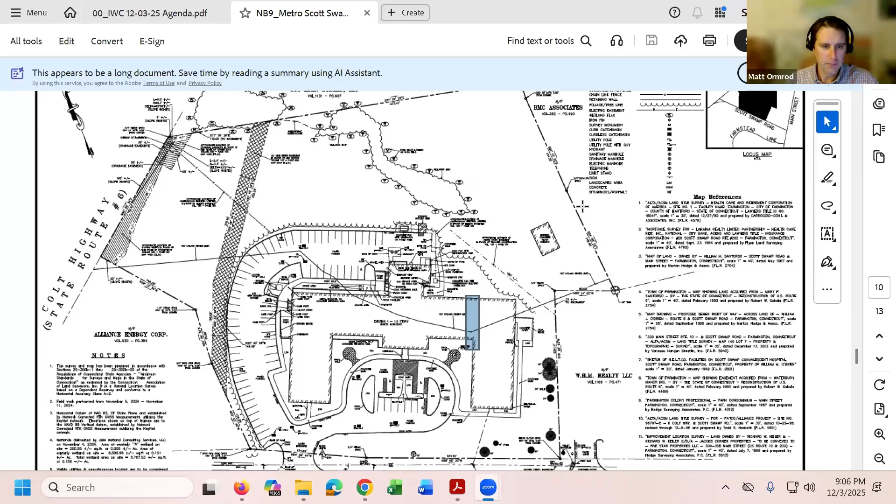And then if you visit the site, it's very clearly a graded terrace upon which the current development sits. It's probably a little speculation that the material was just excavated from the northern portion of the site to build a mound, but given what's out there and what you see on the ground, it just looks like that's what they did to make the development.

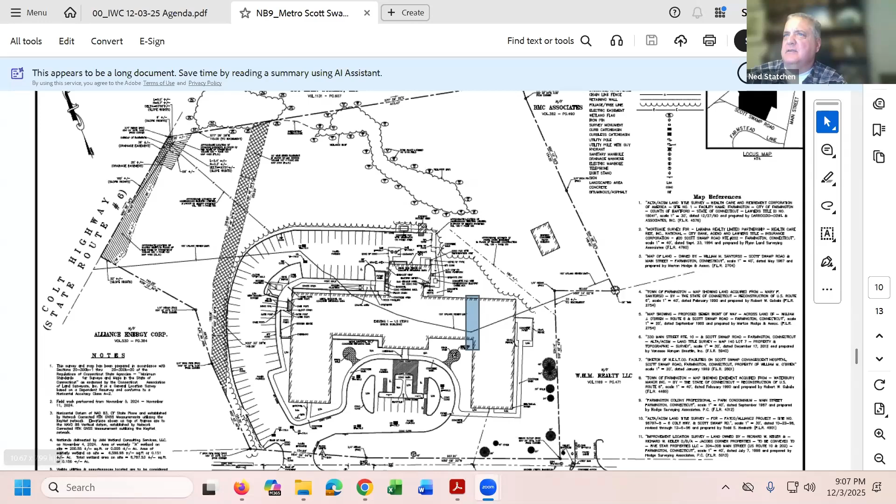I don't know, the question might be for Bruce. This sewer right-of-way that's just on the other side of the property, it goes directly under the pond. If somebody needed to work on that sewer right-of-way, how would that be? There is no pipe there though. There is no pipe.

It's just a right of way, yeah, it's an old sewer right of way. It looks like there's a pipeline in manhole covers. Yeah, no, but well, there's a storm line. Give me a second here.

Sewer and storm - is it storm sewer? There's a storm that runs through this way. There's part of the storm for the parking lot that comes out, and we show it coming around. And there's that sewer as well.

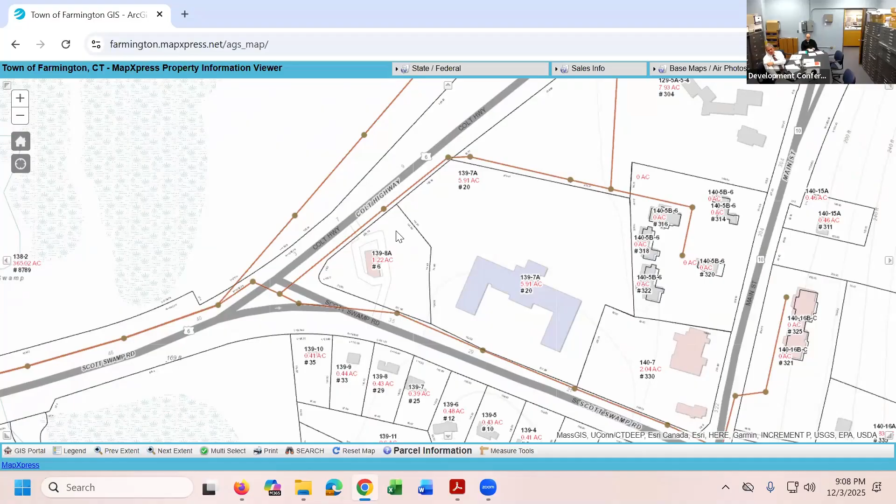Our only thought was that maybe during development they thought we would run a sewer line to connect in here, and they changed their minds. That's all I can surmise at this point. So there's nothing there? The sewer runs behind the back of the building and along Scott Swamp. There's nothing there presently for sanitary sewer. Or do I think we'd need it in the future? That's something for us.

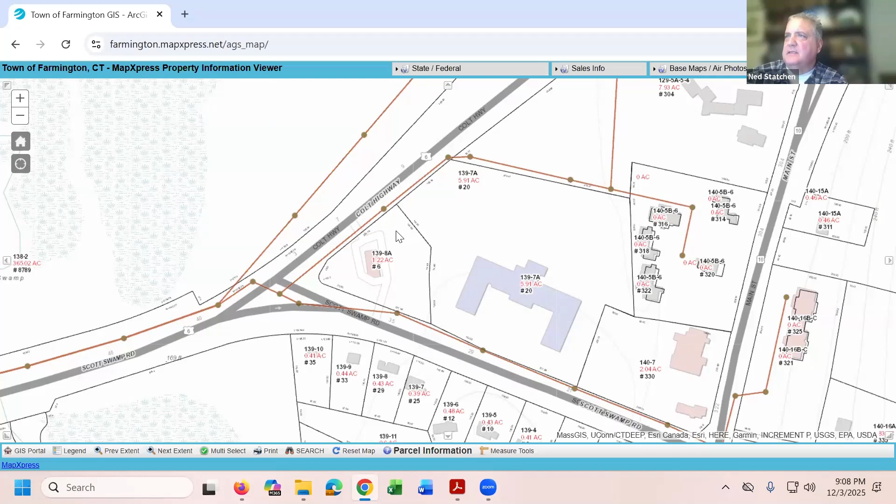Well, I think seeing that this feeds into the Pequabuck River, I think we'll have to have a site visit on this. The thing that concerns me most on this project is building B, because the grades are so steep at the back of it. Based on this, the 180 and the very close contour lines being called out, I think it might cause problems, but we could take a look at that. That's all the questions I have right now. We'll see if anybody else has questions.

Andre, do you have any questions? Do you think we would use a site walk on this? I think a site walk would be good for this, and I don't have any questions at the moment. Okay, Rich?

The square footages that you quoted, does that include these - I don't know if they're patios or porches - off the backside of building B and C? Yes, I included those in the calculations. Okay, as Ned said,

I have serious concerns about building B being so close to the wetlands, and I do believe a site walk is needed on this project. Thank you, Rich. Dave Fox? Yeah, I agree, site walk for this one.

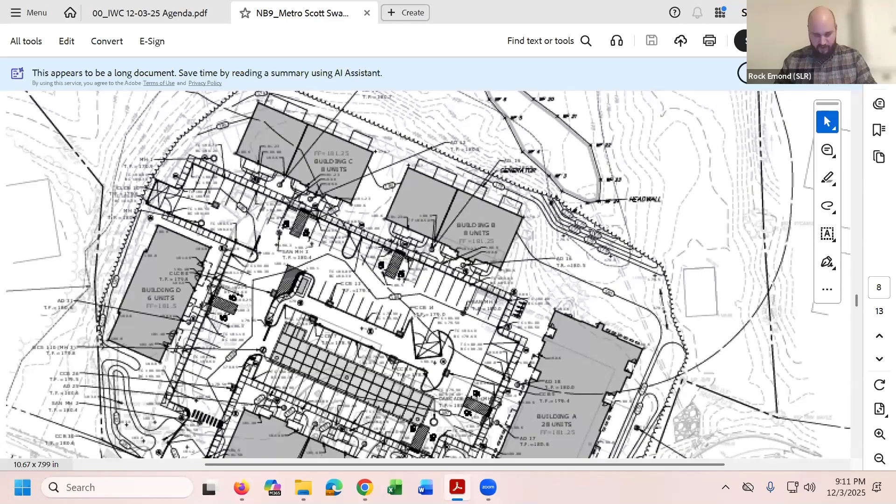I believe one of the slides provided as part of this presentation has that. Bruce, if you can go up a couple slides - yep, right there, there's a red and black overlay. What's in red, that kind of swirly area, is the existing tree line. Okay, that's exactly what I was looking for. We didn't have that available.

Actually, just to hit something right here, you can see that the distance from building B to the wetland is a little further away than the existing parking lot today.

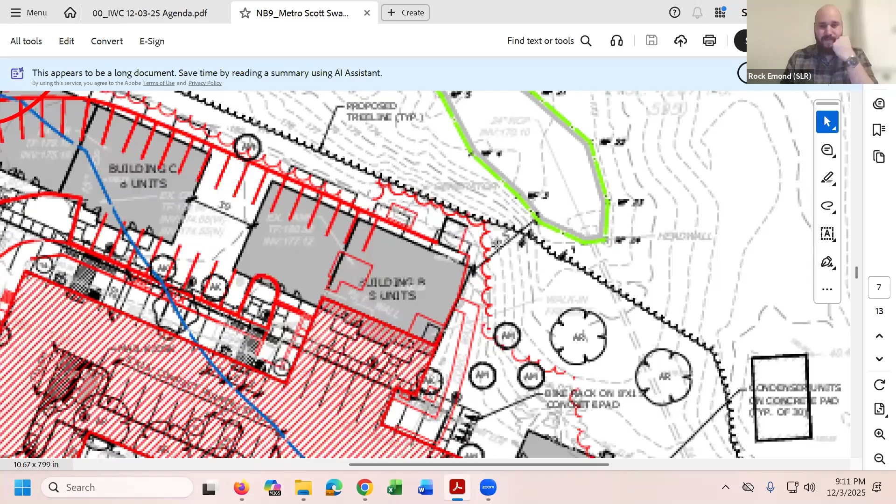Let me try something, because that PDF you sent us is very - I think I have the final. Here we go, we can see it a little better in this set.

So this is the existing parking area here, correct? Right, this line here. Correct. And then that building, and then that comes in. Where's the building? Okay, I didn't see the existing tree line, but now I do. So, okay, I take my question back - it was already here, I just didn't know.

Hey, that's why you ask the question. If you don't ask the question, you'll never get clarity.

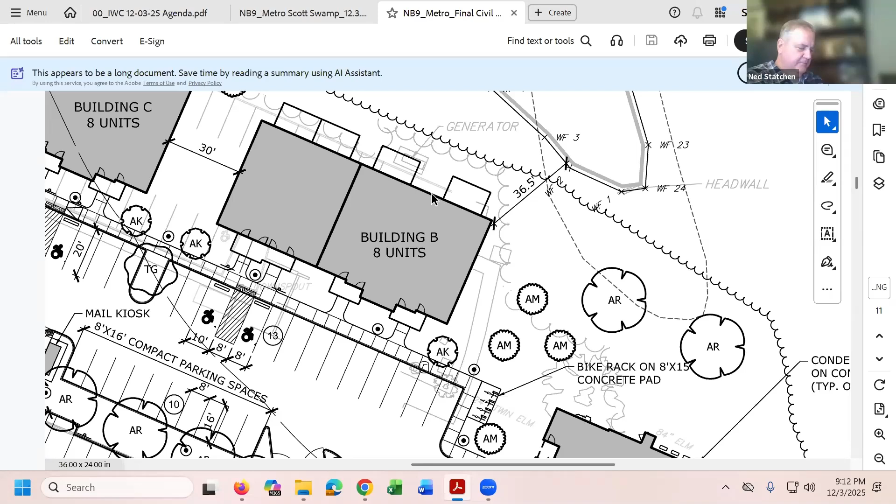That generator on there, that's existing, right? That's an existing generator that would be removed. Okay, I'm sorry, Dave, to cut you in - go ahead. Oh, and I had one more question. Wetlands - there was a discussion of a depression area near the head wall and frogs. I was wondering if there was a potential for vernal pools in this wetland system.

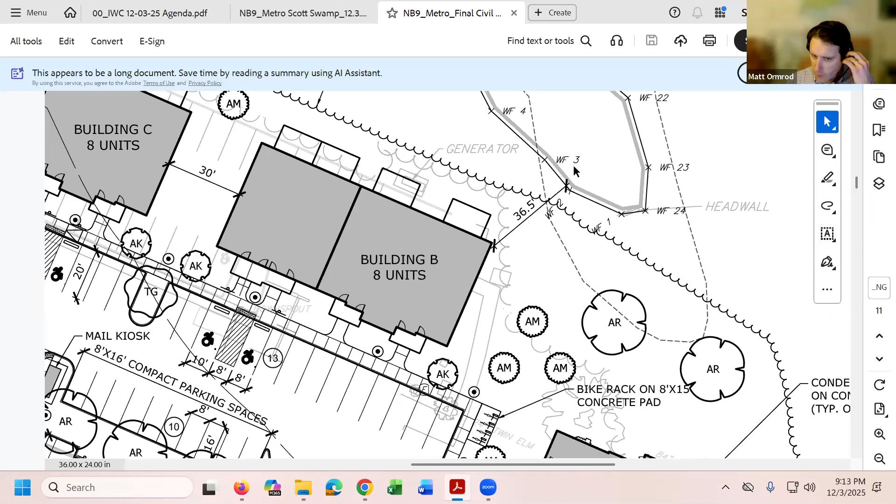Thanks, Commissioner Fox. Again, Matt Ormrod, SLR. So it looks like at the head wall, it's actually a great photo. We're zoomed in right there, right now.

There is a scour pool. The velocities coming out of that discharge pipe over time, I don't know how long that pipe's been there, but it's scoured a depression. During my site visit, there was water in that depression. I give a depth in my report, not that deep, but there's high turbidity, not good water quality.

There were several green frogs actually using the head wall, which are not indicative of vernal pool habitat because they need, I think it's their maturity, 2 years, so they need a perennial surface water. So the presence of green frogs and nothing else might suggest that scour pool might be more of a perennial feature, might be like a drainage issue. I hope that answers your question.

Well, just given the general topography and the amount of water, would it be helpful to go back in the spring and confirm that there's no vernal pools here?

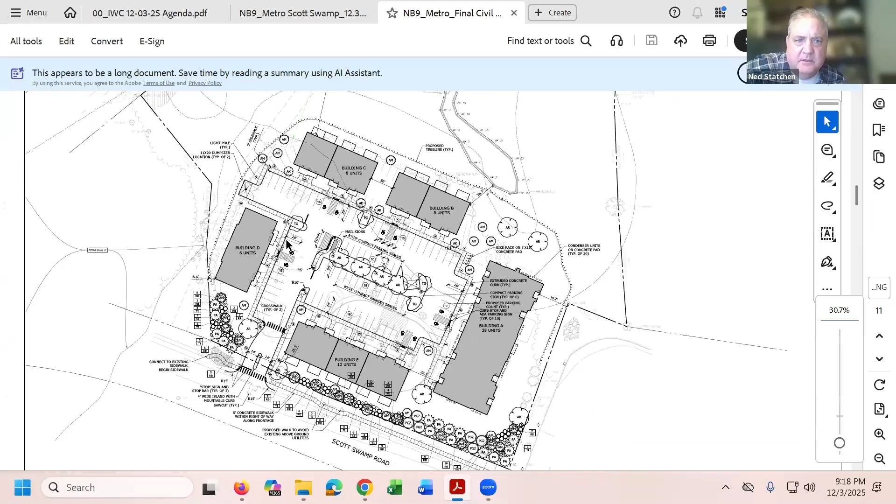We seem to be mostly concerned, if we were to do a site walk, could you have somebody, depending on if it's in the pavement or on the grass, mark off the corners of building B and building C? Yeah, absolutely, those will be easy because we can use existing pavement as a guide. But depending on when the site walk is and weather conditions, I can certainly do our best to get actual stakes out there for precise locations. Okay, well, precise more or less.

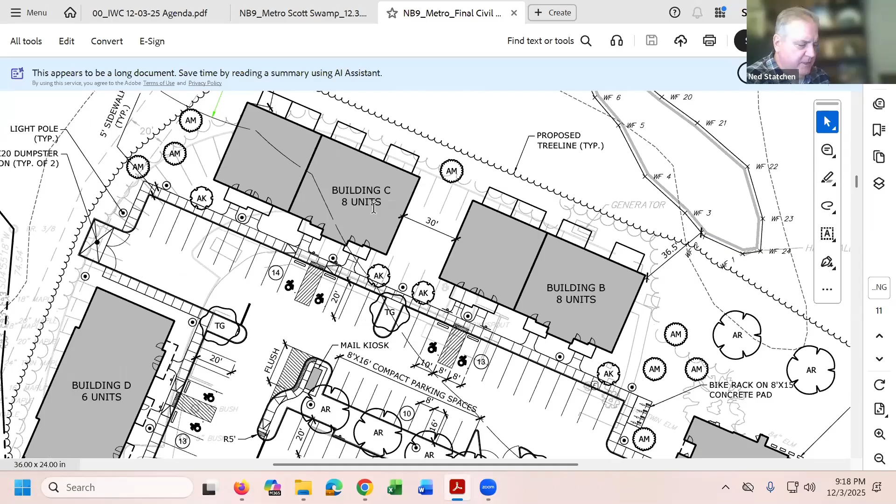Yeah, and do you have anything else, Bruce? We can also bring a handheld GPS if we need it. Do you have anything else that you think would be good for the site walk?

No, I mean, are any of these wetland flags still out there? Did SLR flag them at all? Yeah, we resurveyed just, I'd say 3 or 4 weeks ago, and those were picked up on that survey. Okay, good, so those will be there for our site visit.

And then we'll probably want to maybe look at this wetland and maybe even this pipe outlet too. I'm not sure if there's access down to those, I'm not sure how to get down there, so we'll figure that out. I'm thinking those are the areas that I want to look at.

Since everything is feeding into that, what is it, an 18-inch RC pipe? Could you do an examination or inspection of that pipe? Yeah, we call for a TV inspection to be performed in the pipe to see if there's any degradation, but we anticipate that it's functioning properly due to it still discharging water at the low end. Yeah, RC pipe lasts a long time. Okay.

All right, so it seems like everybody wants a site walk, so let's have the chair entertain a motion to accept the application.

So moved by Dave. Second, please. Second. Okay, motion's been made and seconded to accept the application. All those in favor say aye. Aye. Opposed? Abstain? Motion passes.

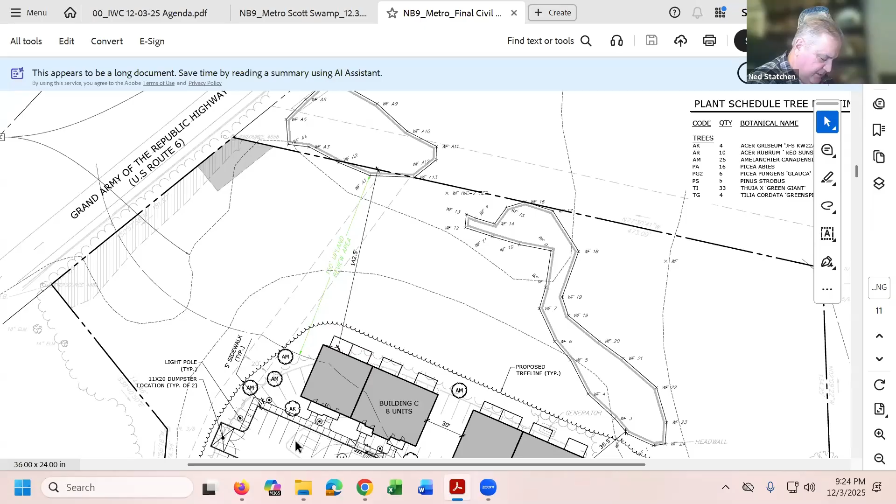We need a motion to approve the minutes of the November 22nd inland site walk meeting. Chair entertain a motion. Someone who was at the site walk can do that. I'll make it. I'll second. Motion's been made and seconded. Who did I get for the motion, and who seconded it? I made the motion and Andre seconded it. Gotcha, sorry about that, your mic cut off. All right, so we have a motion made and seconded. All those in favor say aye. Aye. Opposed? Abstain? Dave abstains. Rich abstained. Motion passes.

Okay, if there's nothing else, we will adjourn the meeting at 9:25.

And go right to our conservation meeting. Call the meeting to order, 9:26. Any new business? Any planner's report? No, nothing on those.